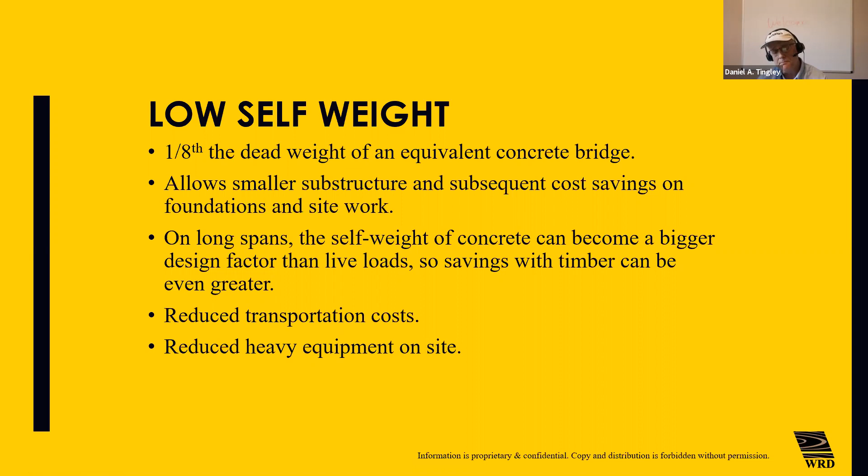It allows reduced transportation cost because the system itself is lightweight and providing great strength to weight ratios. And it reduces the amount of heavy equipment on site. The crane sizes can be less, and the site preparation works and cost can be less. This also leads to another point, and that is rapid installation.

When we fabricate the components off-site, for example, in greenfield construction, where we're machining and developing and assembling the bridge prior to treatment, that means that when we take it apart, letter and number it, send it out for treatment, make sure the treatment is right, send it to the site, the components can be, in a sense, put together much more quickly, and on-site times are reduced.

This is a big factor, particularly where you have short building seasons, environmental issues like rivers that can't be worked over or in during certain times of the year. So these things are important. It's important when you think about working during the winter, when you have to charge up concrete with plasticizers. With wood, you don't face those sorts of things.

It's important when you think about paving a bridge - you certainly don't turn on vibratory rollers to pave and get good consolidation on a freshly minted concrete bridge. You can with timber. So these things all improve the installation characteristics and the speed with which you can do it.

This is a bridge here in Brisbane, Australia that I designed. It's a 2-lane bridge with a 2-meter wide sidewalk where everything is assembled on this bridge, and the whole assembled 10-meter section drops into the cantilever clips in this bridge with one lift. The crane operator for this job shared with us that the previous week he had lifted a precast concrete girder for the same span - one single girder - that weighed more than the entire assembled segment they're lifting there.

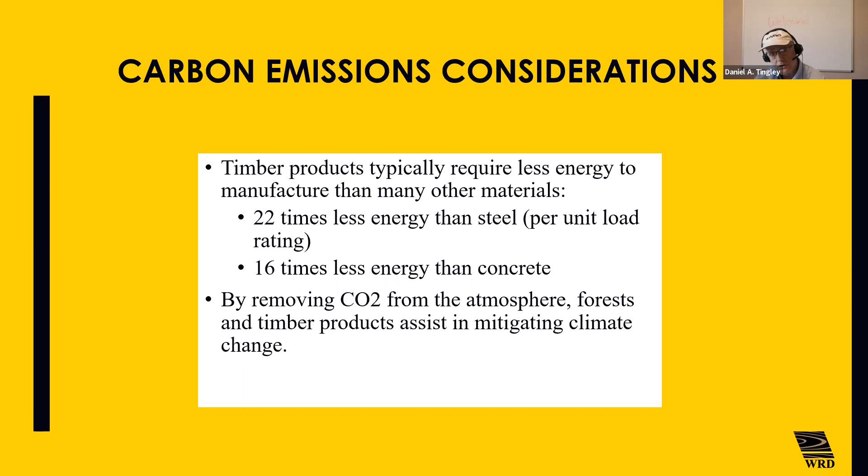Timber bridges traditionally take 22 times less energy than steel and 16 times less energy than concrete. And by removing CO2 from the atmosphere through photosynthesis, trees sequester carbon and put oxygen back into the environment. Wood is just the logical choice for timber for bridges.

Wood also has factors like chemical resistance. In Nova Scotia, we don't allow the use of rust-resistant steel because we know that a patina of dew or water on the surface of rust-resistant steel that has salt inladen with it means that it will reduce its longevity, not improve it. And so in Nova Scotia, many parts of Nova Scotia and some of New Brunswick, the southeast portion of New Brunswick, we're in the highest, what we would call embedded and exposed corrosion zones in the country. Not nice places to build steel stuff.

Wood has a natural resistance to these issues. For example, we put salt on the road - salt is a natural preservative for wood. It doesn't lead to corrosion of wood. Wood doesn't rust.

I often hear people saying they look at a rust stain on a wood bridge from a piece of metal and they say, look, the wood is rusting. Wood doesn't rust. It might have ferric ion degradation from untreated steel connectors, which leads to an embrittlement of the lignin, but it doesn't rust.

Wood is with great advantages in cold climates. It doesn't shrink and expand with thermal change to near the effect of steel. Steel's coefficient of thermal expansion is 3 times timber. And of course, in these coastal environments, wood has such great chemical resistance. Fatigue resistance, wood doesn't need a dynamic factor like steel, an impact factor. Wood responds very well to impact loads.

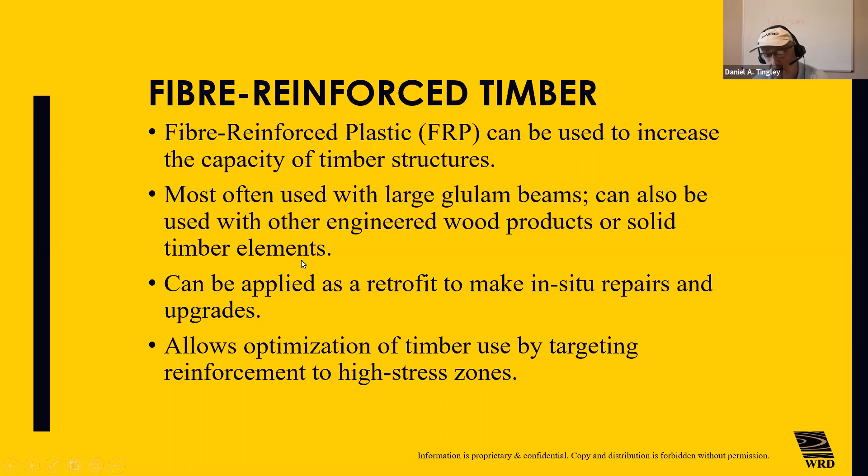We can use advanced technologies like high-strength fiber reinforced polymers, using them in strategic positions to enhance capacity, to compensate for reduced capacity that's occurred because of decay, for example. We can take these long pieces of fiber that come on a roll, five times the strength of steel at a fifth the dead weight longitudinally, with no strength perpendicular to the axis, so they can be put on a piece of wood and move with it, shrinking and expanding without causing delamination, enhancing capacity in situ.

This is a teaser slide for next week's webinar, where we're wood welding things. We take shear plate pilot holes, and instead of leaving them as open holes where they can slip, we put them in this hole and control slip distortion.

Infill this pilot hole, glue FRP to the face, and separate it from the steel with saran wrap so it doesn't glue, because the steel has a three-fold difference in coefficient of thermal expansion. Use the continuous piece of FRP on the bottom of this to double the capacity of the glulam.

We do three bridges for the price of one, and post-treat everything after machining so that it lasts 100 years. This is what we're talking about. This is the new timber bridge. These are the concepts and ideas that nest themselves in the idea that timber bridges can last, they can carry heavy loads, and their maintenance costs are lower. That's what we're here to say. So that's a teaser for next week.

Timber can be quite durable, but durability depends on quality of the wood, the preservative, the use, the environment, and the loadings that are applied. Timber does not behave in a truly elastic mode, but has kind of a time-dependent behavior. It's kind of different, isn't it? It's not the same material.

One of the hardest things I have to do as a senior engineer at WRD is to hire older steel designers. It's a very difficult job. And my favorite is to take younger engineers that have a lot less experience and help them understand about timber, and train them about timber and have them become timber engineers. Why? Because they don't have to retrain bad habits.

Wood is anisotropic, steel is isotropic. Wood is hygroscopic, it breathes in and out moisture, and when it does, it shrinks and swells. Steel doesn't. Wood doesn't expand nearly as much under temperature change as steel. And when wood shrinks and expands, if you've frozen it to something where it can't shrink and expand, what happens? You introduce tension perpendicular to grain forces, and tension perpendicular to grain is wood's weakest strength direction, on the order of 0.1 MPa. So understanding how to design with steel versus wood is pretty critical.

So let's just set up the foundation for ourselves, the basis by which we design wood in an advanced way. After all, it's the fundamentals of wood that really create an understanding of the building blocks that you use to grow your design capabilities as an engineer. It's important to cycle back and think about what is this material called wood, and what interesting characteristics does it have that are positive for us when we're designing a bridge.

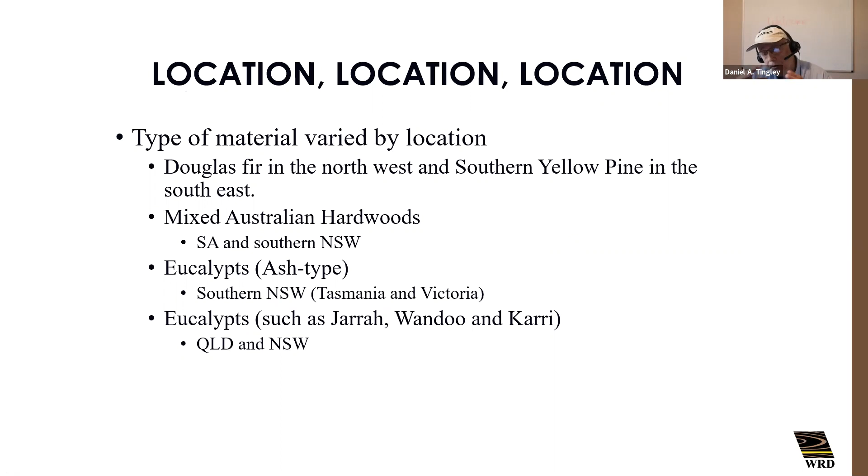And location, like real estate, was everything. And around the world, what did we use? Well, in the northwest part of the United States and Western Canada, we used Douglas fir. It was there. In the southeast, southern yellow pine. In Australia, we used mixed Australian hardwoods. All around the world, we used the materials that were readily available. And these materials were available in great supply at low cost, and so was the cost of manpower.

And this material became the predominant material for infrastructure growth 100 years ago. Cutting big trees down, cutting them up, one tree, one train, and sawing them into lumber and building infrastructure.

Well, today we often look back and we say the big wood's gone. We say good wood is harder and harder to find, and the big trees in Vancouver Island, for example, they're in parks. And the environmentalists don't want us to cut down the old growth because they want to have a few old big trees for the kids to see, and they want to have an opportunity to see and relish the size with which some of these trees can reach. Like the General Sherman tree, where you can drive a car through it in California, or the President, a huge tree nearly 50 stories high in California.

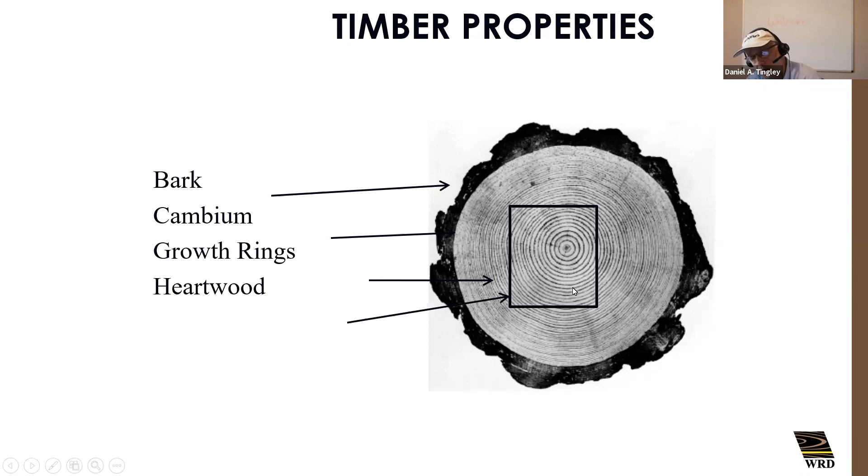You can see here, for example, Doug fir, it's a Doug fir log. The first 20 years are juvenile wood. They form the heartwood, that's the inert portion of the tree. This is the sapwood here, and you can see a much tighter ring structure.

Well, that isn't happening by accident. How come this is happening? Because the cells grow around the tree. I'm going to stop here and go over to the board for a minute.

Here's a round log right here. How do cells grow on this tree? Trees grow volumetrically. If I have a tree like this, this is my trunk, it's growing volumetrically, it grows radially. It's not grass. Palm trees are not trees, they're grass, they shouldn't be called trees. Trees like maple and Doug fir and southern yellow pine grow radially.

And what does that mean? I have at my home, not far from here in Lower Cape, New Brunswick, a maple tree out front that's 250 years old. There's a branch on that tree, and there's a swing on that tree, and my dad's dad swung on that swing, because the tree has been on the household property for 5 or 6 generations.

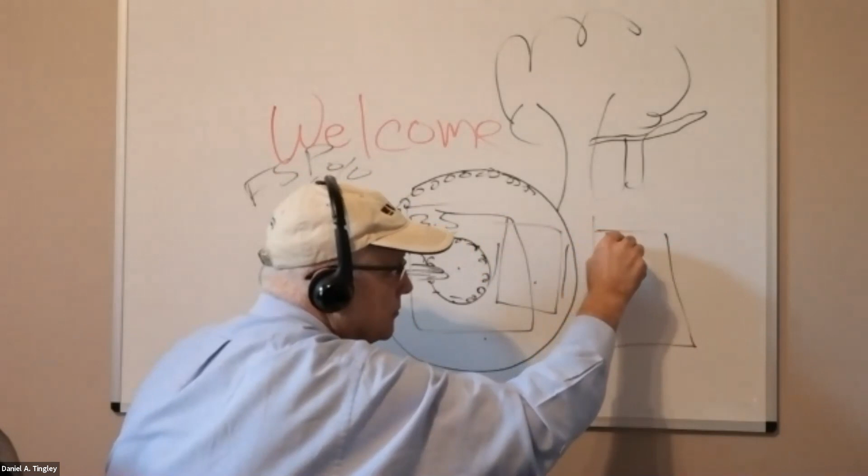So if I cut a boxed heart, it's going to shrink more evenly on all sides. If I cut a cant, it shrinks more on this face than that face, and it will look like this after it's dried. So if I've got that piece of wood sitting on a cap, it creates instability by shrinkage. If I've got a boxed heart for a cap, it's better because of less instability due to bearing. That's how trees growing volumetrically impacts how we use them as timber engineers.

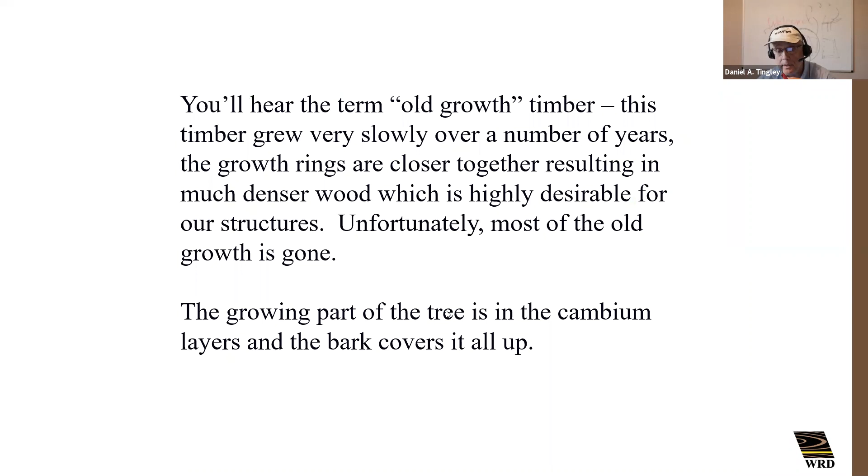As you look up the tree, you'll see something very interesting: it's growing straight. Why is that? Because softwood trees are geotropic—they grow in response to gravity. Their specific gravities are generally lower than those of hardwood, which is phototropic. Hardwoods grow phototropically; they respond to light.

They reach for light, and when they do, that causes slope of grain in sawn timber out of them because they're bending, crooked, twisted. Softwood trees grow straight up and down, and that's because they're geotropic.

Doug fir has 2/5 the height in its crown, which means this big clear length here would have no branches. What does a branch do? It forms a knot when you saw the timber out of it, and the knot is denser than the rest of the wood, but it creates slope of grain. That's why the wood is weaker—because of slope of grain. We'll get into that in just a moment.

So this phototropic nature of hardwood causes it to grow in response to light. The geotropic response of softwood grows in response to gravity. It's got slope of grain driven by the axes that the piece forms against the growth.

Now I've got this piece of wood, sawn from a round log like this. Here comes this log, tapered, and I saw a piece off of it. The angle that the sawn piece forms with the trunk creates a slope of grain, so when I look at the side of a piece of wood, here's the grain, and that angle right there is slope of grain.

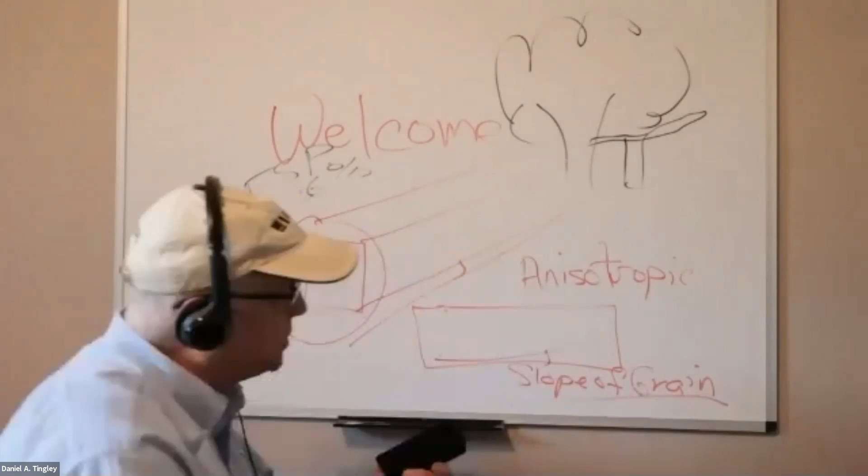Why is that a problem? Well, because wood is anisotropic, meaning it has different properties in different directions. So what is it about this slope of grain that takes the anisotropic nature of wood and creates trouble for us as engineers?

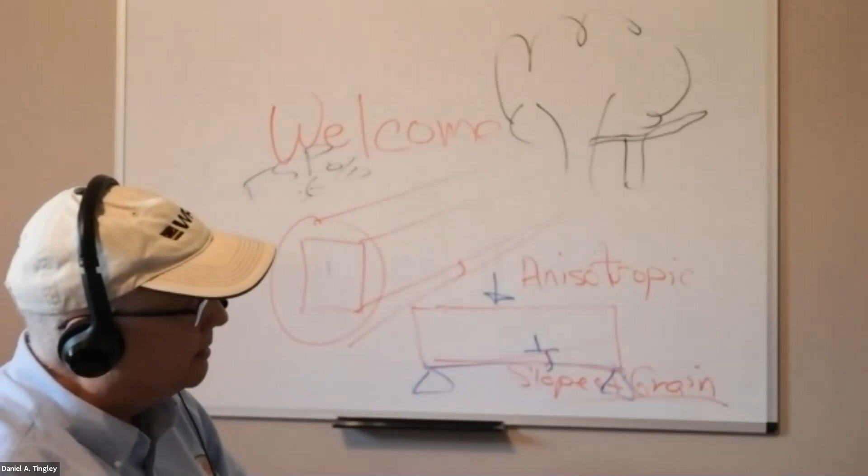When I saw a straight piece of wood out of a tapered bolt, I end up with the axes of this wood at an angle to the grain. If I put this in bending, the bending forces can be resolved into tension parallel to grain and tension perpendicular to grain, and wood's tension-perpendicular-to-grain value is low in terms of strength. The more the slope of grain, the more resolution of stresses to perpendicular-to-grain tension, and the weaker the wood is in bending—it's the tension perp that gets you. So we want low slope of grain; that's what forms up structural select wood in our grading.

Now, when I have a knot, what happens to the grain? The grain follows the knot around.

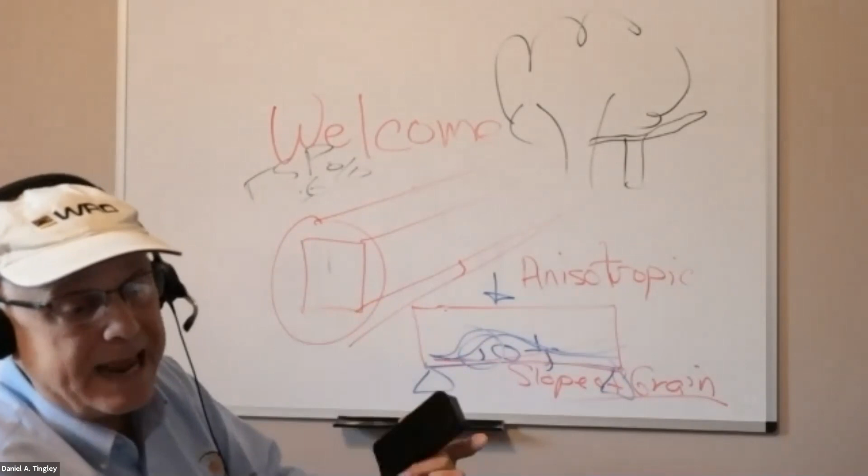If I get a knot in the bottom face of my piece, it causes a slope of grain, a big one, and that resolution of stresses causes a bunch of tension. The knot is the localized defect, the naturally occurring defect that leads to slope of grain, which leads to reduction in capacity. It's why we grade things for knot size, and why we keep the big knots out of the bottom face in tension.

If you're designing heavy dimension timber beams, there is an upside down. When I went to school at the University of New Brunswick, nobody taught me in my forest engineering degree that large dimension timber has an upside down. Why didn't they teach me that? Why did I have to install a bunch of girders and have half of them fail before I finally figured it out?

The reality is, when we're not teaching engineers about these issues and instead teaching them about steel and concrete, what will they use when they get out in the marketplace? Steel and concrete. And when they install the new girders in the old bridge upside down and they prematurely fail, the owner of the bridge says, to hell with timber, put a new steel and concrete one in, I can't pay the maintenance cost anymore. You see, that's not wood's fault. Understanding that is important for us if we're going to properly design with timber.

At the tip of a tree, there's a hormone called auxin that tells a tree how tall to grow, where the roots go, the whole deal. The root growth kind of looks like a microcosm of the crown of the tree up top, only underground. And the tree, as it grows, forms a microfibril angle.

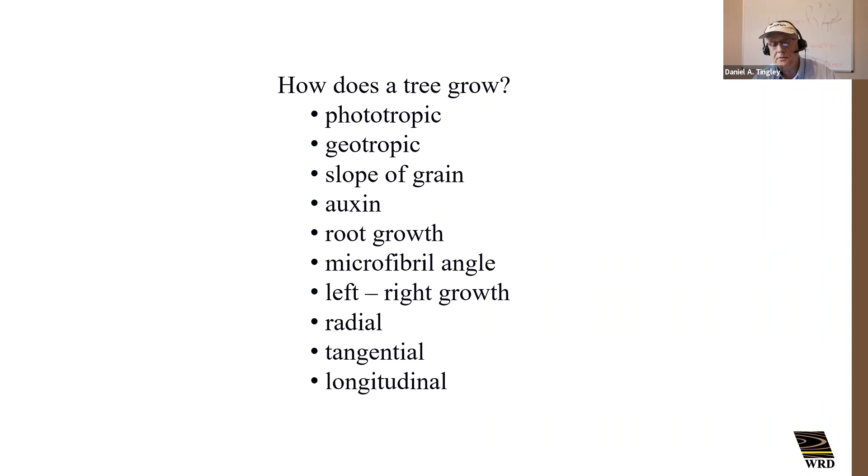On the northern hemisphere, trees grow and twist from left to right. In the southern hemisphere, they twist from right to left, just like the water in the toilet bowl if you're in Australia. So trees have a radial direction, a tangential plane, and a longitudinal plane, and they're different.

They have different characteristics. Wood has 9 degrees of freedom: 3 Poisson ratio, 3 rigidity modulus, and 3 modulus of elasticity. That's a big deal if you're using structural software that only allows you 1, 2, or 3, and you're putting loads into a structural software for an assembly of wood, and the wood hasn't been modeled with 9 degrees of freedom. Guess what? The results may not represent your true stresses.

So timber's properties are based on orientation of the grain and the direction of the fiber. Its density bears directly on its properties. Typically, the denser the wood, the higher the MOE, and the bigger the increase in capacity parallel to grain. But not all characteristics go well with increased density, because hardwoods could have increased density but much greater slope of grain, which would make it very, very weak. And if I couldn't drive a nail in it and I had to drill everything with holes to put bolts in, it wouldn't be user-friendly.

Thus, Douglas fir and southern yellow pine became the wood of choice around the world. Their specific gravity was 0.48 to 0.54 for the two of them, about half the density of water. That's why specific gravity is about 0.5. They could still be nailed without splitting and checking or breaking the nail. They're relatively strong. If you sawed them on the right bolt, you could get low slope of grain. And then if you graded them for knots, splits, and checks, conditioned them and controlled their moisture, you could improve their dimension design properties. These types of woods became very popular in the world.

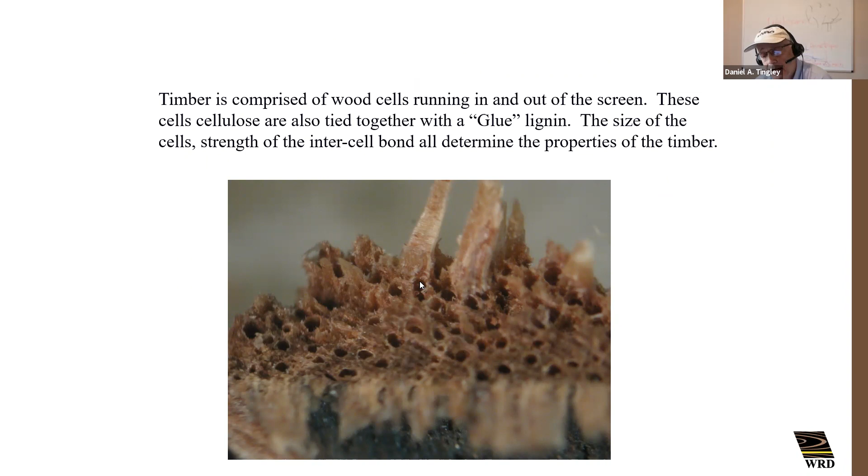Cellulose, hemicellulose, glued together with lignin - that's what formed up wood. And you notice this piece here, how did it fail? It was in the roof system of a pulp and paper plant in Washington State, and it had reaction wood. It was called compression wood in softwood beyond this webinar - reaction wood in softwood is compression wood, reaction wood in hardwood is tension wood. It was put in the wrong place in bending and led to failure.

So we need to understand these characteristics of wood. Timber properties are based a lot on how it grows. It has localized defects like knots and slope of grain. These things all get considered when we're developing design values.

For example, with wood, the composite adjustment factor used to calculate the design value for strength properties is based on 1.3 for safety, like concrete and steel, the same kind of safety factor, and 1.6 for duration of load, because wood tends to creep. It's got a viscoelastic lignin, that's the glue, and it will creep under constant load. So we change this 1.6 effectively by using a CD factor in Canada, or load duration factor.

Our current design values are based on the assumption that our live load will have a cumulative life of 10 years on our timbers. If that cumulative life of 10 years is assumed to be longer because of higher percentage dead load, we factor down the strength, effectively increasing the 1.6 DOL. If the load is going to be less, like wind or impact loads, we factor it up by using a different CD value, 1.25 or 1.15 for snow, for example.

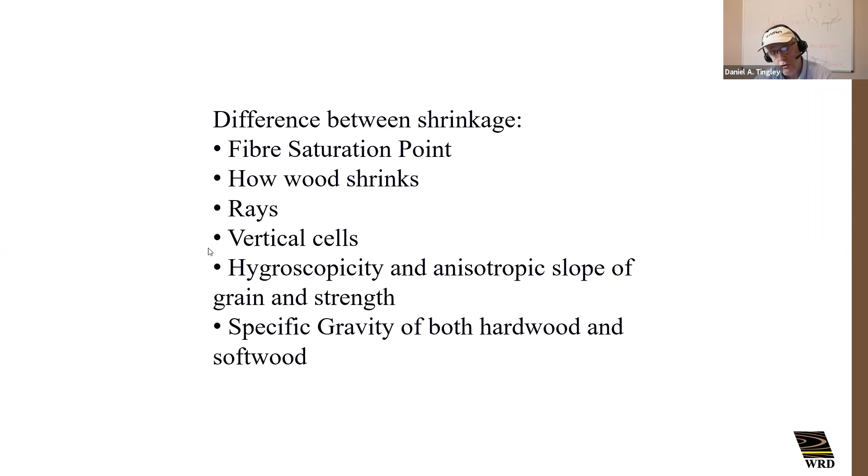That's the point where the water in the cell wall has saturated the cell wall, that's fiber saturation point. When wood picks up more water and it goes into the lumen, it doesn't shrink and expand anymore. When it loses water under fiber saturation point, it does shrink. And the cells within wood go radially, vertically, and they're all the same. They're hygroscopic and they're anisotropic. They have different properties in different directions because they're longitudinal in nature, most of them, whether they're rays going across the radius of the wood, or cells going up and down the wood. They're longitudinal in nature. That's why they make great paper.

So fiber saturation point has got bound water and free water. When I get a spruce tree in the Maritimes and I cut it down, in the winter we used to cut our wood because the moisture was kind of out of the tree a bit, and we could put it in the spring breakup and float it down the river. Well, when I cut it down, I might have 70, 80% moisture by weight, or 90. Sometimes wood can have 180% by weight. It weighs a lot more when it's sucking up the water than it does dry. And so this wood in what we call free water, or lumen water, L-U-M-E-N, the lumen water doesn't change the dimension of wood, but it certainly changes the weight of wood.

And as it dries out down to 28%, the bound water begins to leave, and then it shrinks. And generally speaking, when water dries out of wood, it gets stronger, generally speaking. So the drier the wood under FSP, the stronger it gets.

So if I put a strain gauge, let's boil this down to something practical. If I put a strain gauge on the bottom of a piece of Douglas fir that's on the bottom of a truss in a through truss bridge, that strain gauge isn't going to act like a strain gauge put on this piece of steel. What happens with it? When I put a sender on it, connect it to a gateway, and record strain from truck traffic remotely, I have to be considering more than just the truck traffic. Look here, here's the tide going up and down underneath the bridge.

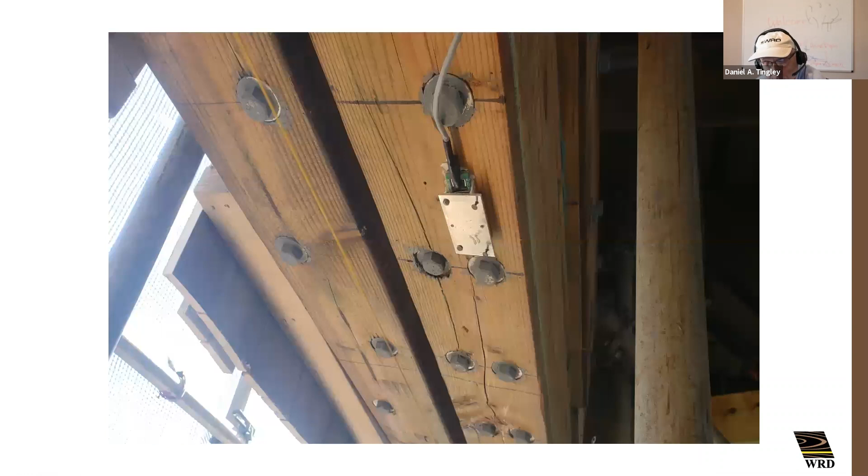Watch what happens to the strain as the tide goes up. That's a steel foil gauge placed longitudinally parallel to the grain in the bottom tension chord. When the tide comes up underneath it, slowly that timber picks up moisture, and when it does, it wants to expand. The steel foil gauge doesn't, and it registers as tension. So you see this increase here, just following slightly behind the tide. We need to understand that to put control gauges in place, to synthesize out the real strain by taking the effects of relative humidity and moisture content change out of the equation.

Understanding wood is important for monitoring bridges, for example. As I said earlier, there's the tangential direction, the radial direction, and the longitudinal direction. Wood basically shrinks negligible amounts, 0.1, even 0.2%, longitudinally. That's how we can use stud wood in the Maritimes to build houses and not have them settle.

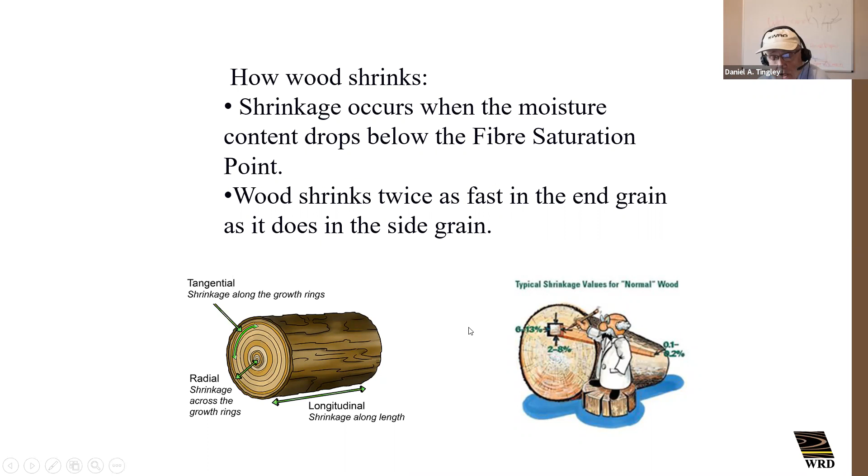In the Maritimes, if you buy a log home, you know about putting spaces above your windows and doors, because when the log home dries out, it'll seize up all your windows and doors if you haven't left spaces. Why? Because it shrinks that direction a bunch. And if you build a six-story hotel with stairwells and headers at the top of each layer in platform framing, what happens? That timber, the 2x12s, can shrink, and you can find your stairwell in problems if it's steel. You have to have slips. That's the nature of wood - it shrinks a lot radially and tangentially, but very little longitudinally.

That's why these shrinkage checks in the end of logs look oval, because the tangential shrinkage is double the radial. That's why they look this shape. That's a naturally occurring check. Why? Because end grain travel of moisture is 100 times faster than side grain. That's why things end-split. It's why they try to put nail plates on the end of pieces of timber, to try to keep them from splitting, because it's 100 times faster end grain travel than side.

So what do we do to control this? The old ways of putting stress kerfs in. It allows air to get into the center. It's a non-structural change to the wood, and it lets it shrink and dry more evenly in these boxed-in hearts. At the Boyce Farmers Market in Fredericton some 35 years ago, I was practicing this technique as a young engineer designing timber post and beam frames in the Maritimes.

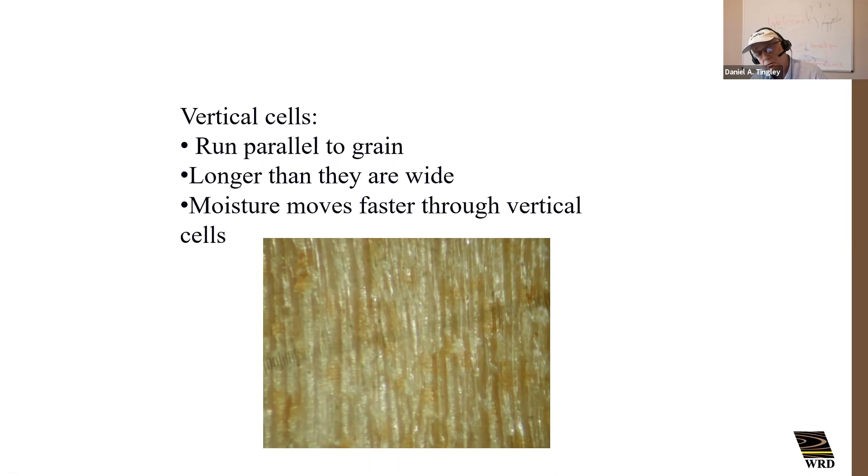So these vertical cells have microfibril angles. They run parallel to grain. The microfibril angle can create a slope of grain, as can the axes of the wood cut against the grain of the wood itself. So these characteristics of wood are driven by hygroscopicity, the anisotropic nature of wood, and its characteristics such as density and knots.

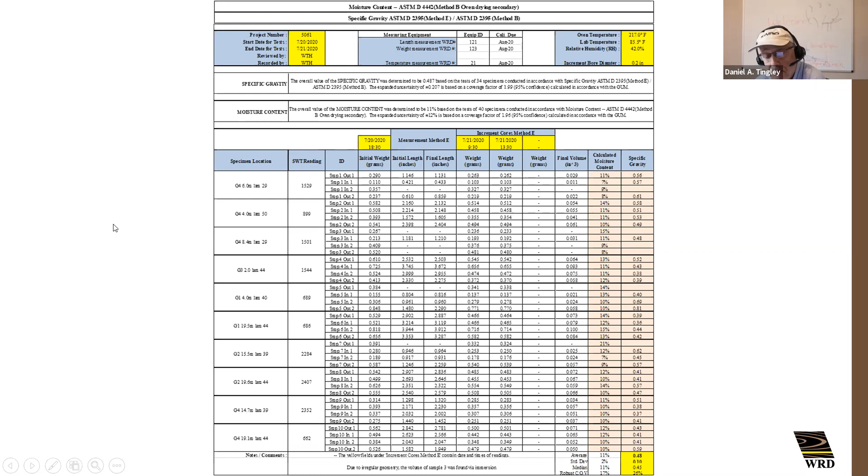We can core out a piece of wood, take the core, check it out and do an ASTM standard test to determine its specific gravity and its moisture content - outer, inner, inner, outer - through the piece. We understand the moisture contents of wood and timber bridges well, because now we've got close to 2,000 samples over decades of wood tested from different bridges all over the world. That's how we know moisture contents.

We can use these small cores to identify them as coastal Douglas fir, for example, and understand that coastal Douglas fir doesn't have blocked up pits that can mean they're aspirated and won't take side grain travel of moisture and of treatment, more importantly. So we usually like to treat coastal Douglas fir timbers for use with bridges, because species, whether softwood or hardwood, grow in a way to form branches, heartwood, sapwood, and density, and all these knots can impact the properties of timber.

So as you see this fissure, for example, that's not a shear crack, that's a shrinkage crack. It follows a ray - a ray is a cell that went radially, in between the cells that go tangentially. So when the cells tangentially were shrinking a bunch, 7.5% from fiber saturation point to zero, the stress relief came along a ray line, and a fissure or check was formed. When engineers go out and see timber in the field, they often confuse checks with shear cracks. They're not the same. We need to know the difference, and we're going to get into that now.

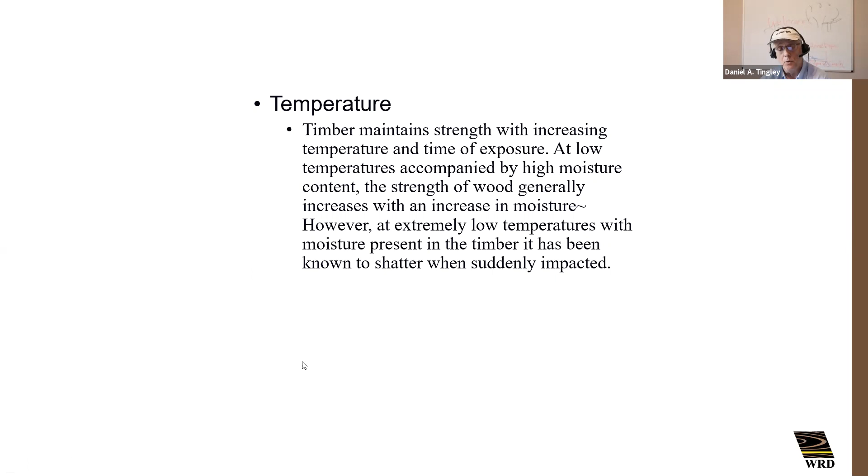Timber maintains its strength with increasing temperature all the way up to 150 to 175 F. It's pretty good with temperature. It doesn't expand like steel, and it doesn't blow the joints out in the building under even low heat fires like steel will. But wood sucks up moisture, and it reduces the modulus of elasticity as it increases in moisture content beyond fiber saturation point.

Particularly, wood does not change in characteristics above fiber saturation point, but it does below it. So design properties can really drive the equation with wood.

You can see this knot. He's on the upside, which is good, but look at that slope of grain. When I put him on a test jig, he fails in tension perp. That triggers an MOR, a modulus of rupture, in bending.

Grading agencies are set up to help us define wood. What's their purpose? Well, if an engineer sits in an office and designs a bridge assuming number 2 or number 1, he puts it on his drawing, then it goes out to tender, and a contractor picks up the drawing and wins the bid. He has to be able to go out and buy something the engineer designed. So there are grading agencies in place to help grade lumber consistently so that engineers can use a grade, and contractors can understand and buy that grade. These different agencies are set up around North America and the world to help sawmills, providers, and manufacturers grade their wood in a way that engineers understand.

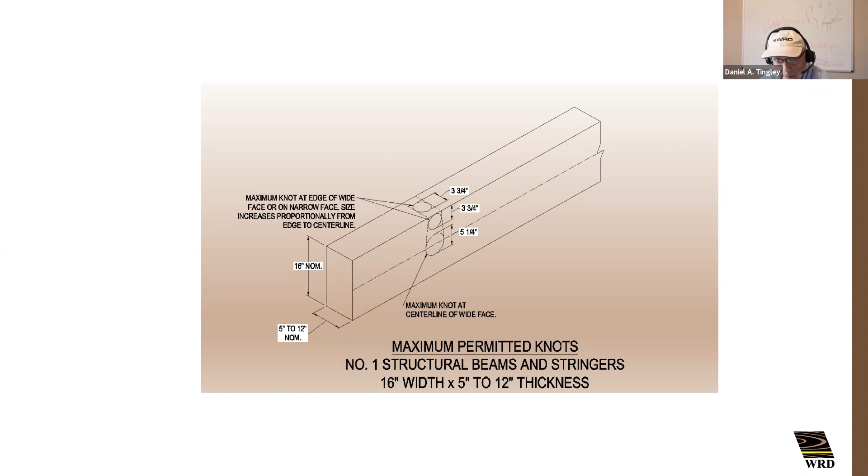When they grade wood in large dimension timber, they allow bigger knots in the compression zone. If engineers and contractors don't understand this, there's a 50-50 chance that even a number 2, number 1, or structural select timber gets installed upside down. When that happens, big knots end up on the bottom, and slope of grain triggers premature failure. We don't like that to occur.

So I'm hoping that everybody online today can understand these important factors in their own design world.

Design properties in tension and compression parallel to grain also trigger mechanisms of failure in wood. You can see here this localized plastic shift, or what happens by the yield point in compression. This is what goes on with this column, as you can see, sliding by one another.

Piles will find localized zones of MOE in compression that are weaker, and they'll find plastic shift there. The plastic shift occurs at different points of the pile under excessive axial load, where the yield point and MOE in compression is lower, and that's where you get these failures. These failures are not nearly as bad as tension failures, because tension failures often lead to immediate global collapse, whereas localized compression failures don't. So these are differences between tension and compression testing.

We can do compression perp. Another interesting thing for engineers: compression perpendicular to grain strength values are not strength values, they're specific values. They're the load, the stress that causes an 1/8 inch deformation in the piece at the reaction, confined to the bottom half or third of the beam. The reason in Canada we have opposite side compression factors for bearing that are more aggressive is that if we have bearing at top and bottom at the same location in a horizontal piece, that creates double the deformation, thus the reduction factors for it.

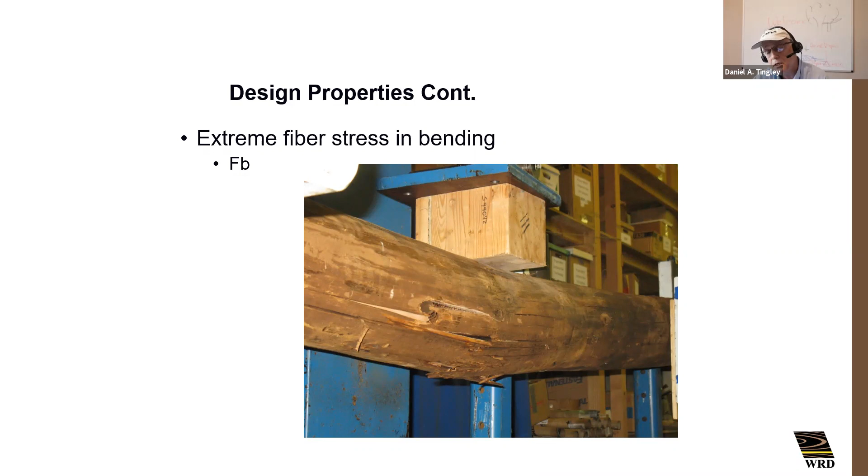People ask in Canada why round log values are so low. Well, it's because we just haven't used them much, and the values for round logs in bending are based on empirical, smoke-filled-room properties. In Australia, you can take a round log and have an F27, or 27 MPa allowable stress design value. The minute you saw a piece of timber from it, slope of grain comes into play, and its value drops from 27 MPa to 17, 22, maybe even 14, because of slope of grain created by the axis of the saw.

Typically, when you see pieces of wood attached, they're not horizontal shear. I wished someone had taught me that the value for shear was not transverse. In timber, what governs is longitudinal horizontal shear, and you can see these shear values for those interested. The late wood, early wood interface is where 66% of all horizontal shear occurs - that's where the wood starts to grow again in the spring. The lumen's the biggest, the wall's the thinnest, and horizontal shear is the lowest, and you can see it here in these pictures.

So the codes and standards in Canada, what are they for? The National Building Code for building with timber, CSA O86, or NDS in America, are for designing with timber for engineers. What do the bridge codes do? The bridge codes like S6 in Canada, AASHTO in America, or 5100 in Australia, stand between the timber design code and the site for a bridge designer. S6 Part 9, I'm on that committee, is an interpretation of how O86 applies to a site with specific reference to highway traffic. And O80, for example, is about how we preserve them. So these standards help engineers design and utilize timber correctly.

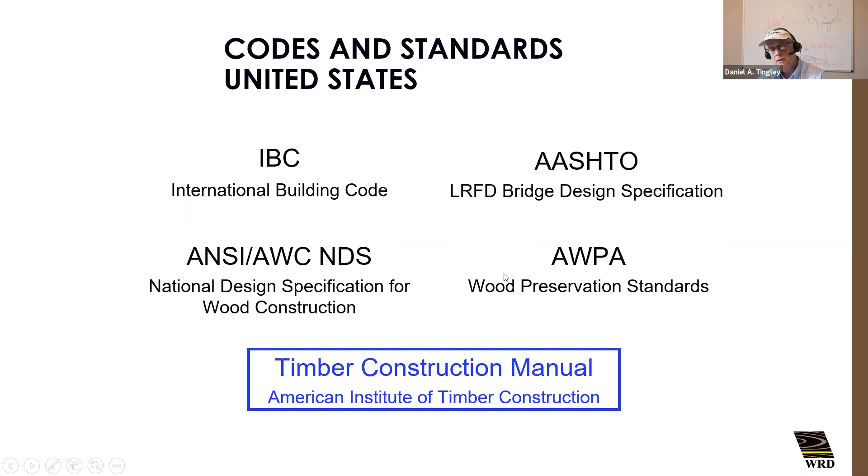We rate timber bridges, we rate existing bridges with Section 14 of S6, which itself reflects back on Part 9 and O86 in terms of helping engineers understand rating of existing bridges. For example, if I'm rating an existing bridge that's seasoned, I wouldn't have to consider it green. If I'm building a new large dimension timber bridge, I have to consider most of its elements green because they go into place green. In a tactile inspection, I can consider them dry because the average moisture content is 14 to 16 under either closed or open deck bridge. What I couldn't consider as dry would be the connectors if there were vertical fasteners originating from the top - I'd have to consider those green because I let water into the bridge core through the fastener. Codes and standards in the United States work the same way: International Building Code, National Design Specification, AASHTO stands between it and the site, and AWPA is the Wood Preservation Standard.

So how do we get the type and quality of timber that we want? Well, the industry has set up these grades. Engineers design according to the design standards, specify the grades, and contractors buy them. These grade agencies have identified these knots.

Just a little review here because it's important - conditions for decay. In an in situ bridge, decay accounts for 82% of all timber bridge degradation today in the world. It's not impact load, it's not salt on the road - contrary to all those opinions, it's due to fungal decay. The conditions to create fungal decay are pretty specific: you remove any one of them, wood bridges don't decay. Oxygen over 21%, moisture over 22%, temperature in a 5 to 35 range, and of course wood is the food source.

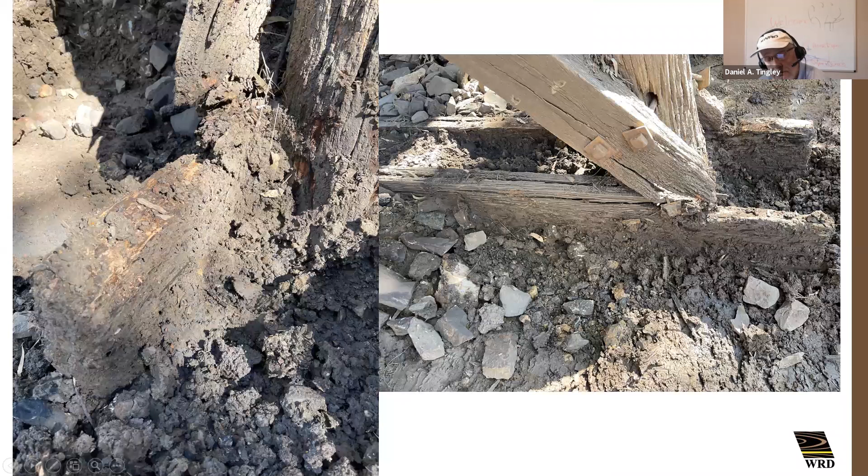And I can guarantee you this is true, because if I put a wooden lawn chair out on the deck out back and I leave it, within 2 years it's done. Because it's decayed. It's just every day. If it's not treated through and through, and if I've exposed bright wood, it decays.

So the combination of decay leads to insects, because it breaks the wood's specific gravity down and it feeds on it. And this degradation comes because there's an enzyme secreted by the hyphae that grows in a fungal colony, and that is acidic. It breaks the wood down. When it does, it's edible. And that edible wood is reduced in specific gravity.

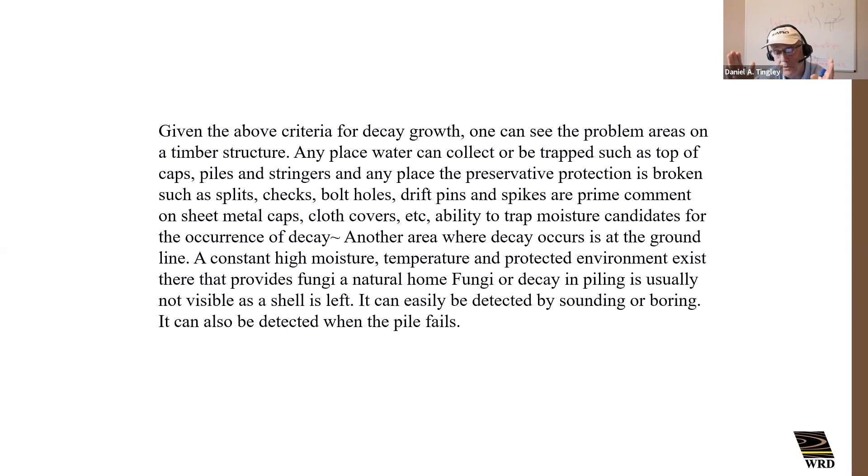And as little as a 10% loss in specific gravity can lead to an 80% loss in compression perp, 75 in bending, and 65 in shear. That's why we see compression bulbs at the ends of beams that have got decayed at the ends around vertical drift pin, is because they lose compression perp to grain first and they bulge.

Why? Because again, it's a specific criteria, not strength. There's no safety factor. It's the stress that causes an 1/8 of an inch deformation. So I get 80% loss. Why? Because I've got a lot more deformation for the same load, because it's losing specific gravity.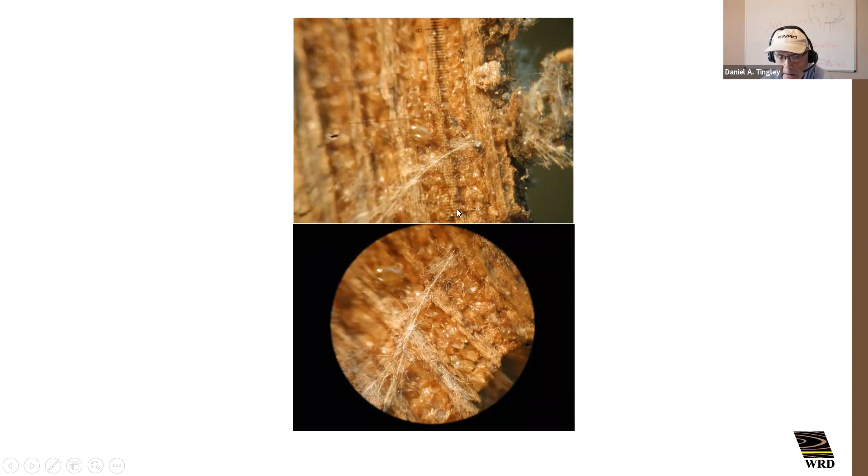So how does fungus grow? Well, it's got a hyphae and it grows cross grain. You can see here, there's white rots growing through the lignin. And it has a foot at the end of it secreting an enzyme. You can see these microscopic shots showing the hyphae here. And this hyphae has got a foot at the end, secretes an enzyme.

And people think, well, I'll drive a vertical spike galvanized into my girder down into the cap, and I'll try to get the water to stop going in by using a mastic around it. Doesn't work. Doesn't work, by the way, guys.

And I put a vertical from the top in this nice creosote treated piece. And I'm figuring it's going to decay in there, and I'm going to have to replace it in 10 years. So I leave the head exposed so that I can get it out easier. And so I'm accepting the fact that wood screws over at 10 years, even when I buy the premium incised creosote treated piece of Douglas fir timber, and I put a spike in it, vertical drift pin right from the top, put a mastic around it.

It still doesn't work. And it leads to decay in this piece in bridges just like this one in Camrose, Alberta. And you can see where it goes. Here's the vertical drift pin. Here's the stress wave time up in the thousands, when 150 to 250 is the criteria.

And this is the reds. And this is another shot. Here's up in the 1,000. And here's the reds. And there's what happens when you put the vertical in, the whole thing decays.

Beyond the scope of this course, but suffice it to say, look, this is an old cast square head vertical. This is the same connector. It's 150 years old. Which part of the connector is still going? The horizontal part. Which part is gone? The vertical part. Engineers listening, stop designing verticals that expose bright wood and originate from the top unless the holes, the pilot holes, are post-treated.

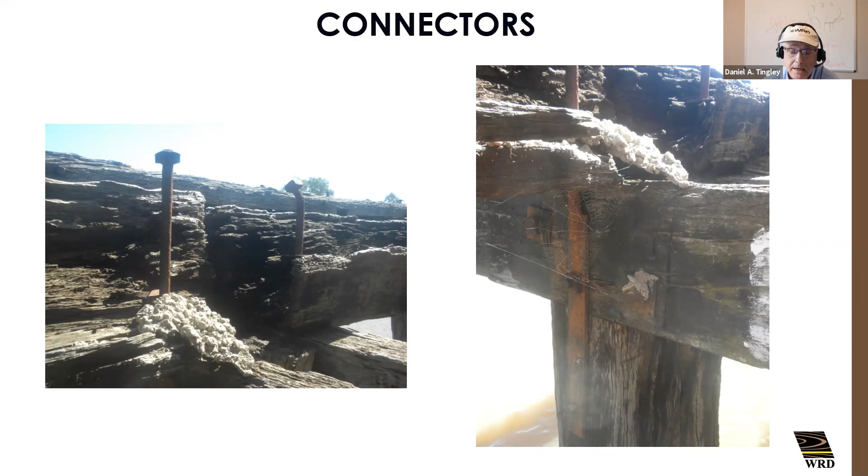Why? Because timber bridges are coming back. They're going to carve out their rightful place amongst the other two materials and be used in bridges across the country. I live for the day we drive across the Trans-Canada and see 3 or 4 of them as overpass bridges. Timber bridges need to come back into play. Design them right and they'll last a long time and people will use them more.

So I'm going to go back to this picture. Here it is. This is the galvanized vertical spike used as a drift pin in a creosoted piece of timber with incising, with a mastic around it. And guess how old that is? It doesn't take a lot of guessing to realize that it's probably in the 5 to 6 to 7 year old range, right? Here's the bottom of it right here.

What's this? That's a fruiting body growing out the bottom of it. What's this? That's the hammer hits from the stress wave timer start, where we're hitting it to measure the stress wave time through here. After 5 or 6 years in service, a brand new piece of timber that would cost you an arm and a leg today, and an arm and a leg for the labor to get it in. And they're screwing it over by putting a vertical in from the top when there's 16 ways to do it right.

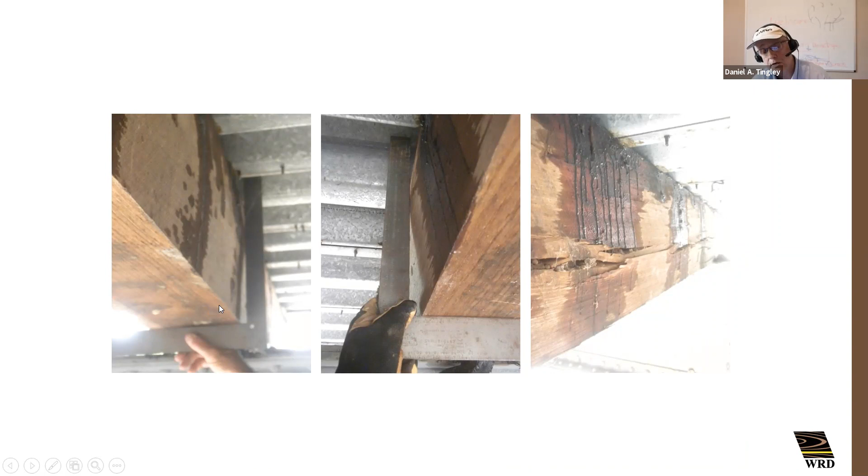Is a ballast tray deck put on 8-year-old cross bearers, vertical lag screws put in, petroleum jelly put down - didn't work. And they started to what? Mushroom compression bulge. Go to horizontal, switch the verticals out for horizontal, turn the 90 with your connectors, stay horizontal, put diffusers into areas that are subject to some decay because of moisture, and use durable timbers.

It becomes more hygroscopic. You know, decay causing fungi aren't stupid. The first thing they do when they start to decay a piece of wood is make it more hygroscopic. Why? So they can get more water. More water means more decay.

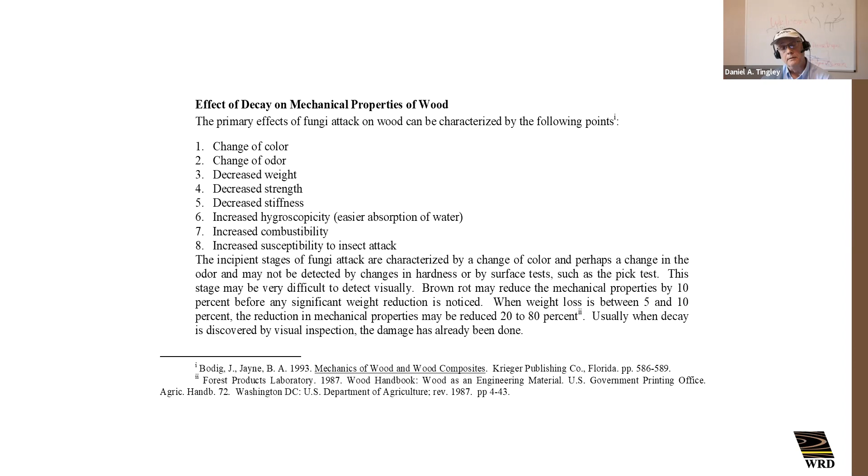What else happens? When you get decayed wood, it becomes more combustible. Its ignition point drops 100 degrees. That's why we can rate bridges now in Canada based on how decayed they are. The more decayed they are around the vertical fasteners, the quicker they burn. Why? Because the vertical fasteners let thermal energy into the middle. It's got a lower ignition point and it burns quicker. And they're more susceptible to insect attack.

So what do we do? We treat them. We don't treat them with waterborne preservatives because what? They leach up against the cell wall and they leach back out the next time it gets wet. Put an oil-borne preservative in there so that it fixes against the cell wall. Water and oil doesn't mix. And that's why codes like AREMA don't allow waterborne preservatives in their timbers.

They specify oil-borne preservatives. This is a Stanford's Bridge on Victoria, Vancouver Island. It was put together in 3 pieces, the flanges and the web. They had a secondary gluing. The secondary gluing didn't work too well, left gaps in a thick glue line. Water got into that thick glue line down below and formed a decay pocket.

And you can see the treatment in here. We knew that they probably weren't coastal Doug fir because the treatment was really shallow. And the laminations were pre-treated before glue. You can tell that by the way they break. And so you can see here what happens.

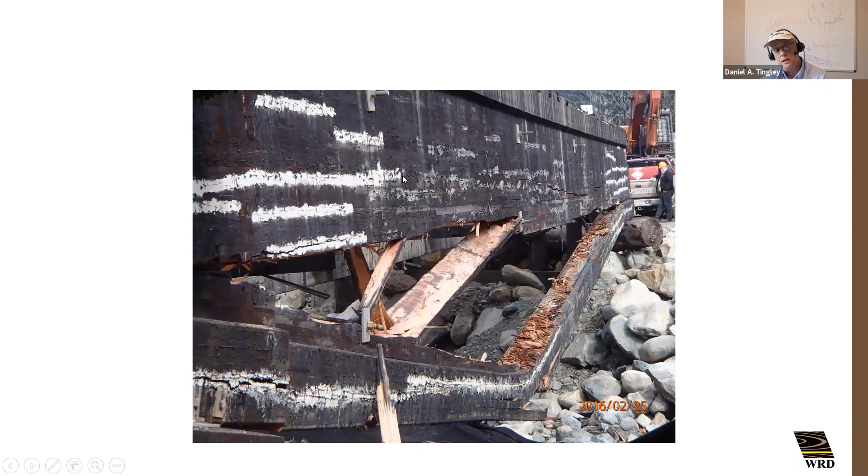And the engineers found naturally occurring shrinkage checks on the exterior girder and specified epoxy. Never works. Don't do it, because it always cracks and lets more water in, and then acts as a dam to keep the water in there. Let it breathe. Let the wood breathe.

Don't use heavy solids, paints and stuff on the coatings of wood over 29%. Let it breathe. So you can see here, cutting the piece. And here's where the piece - this is what caused the failure of the bridge. That's not wood's fault.

Nothing fixes stupid. It's not wood's fault, it's designers' fault, it's maintenance fault, it's the utilizer's fault. They should have found this before it ever became a problem, been able to fix it, diffuse it before it gets run away and decay leads to failure. So proper treatment and its effectiveness is critical when we're designing timber bridges.

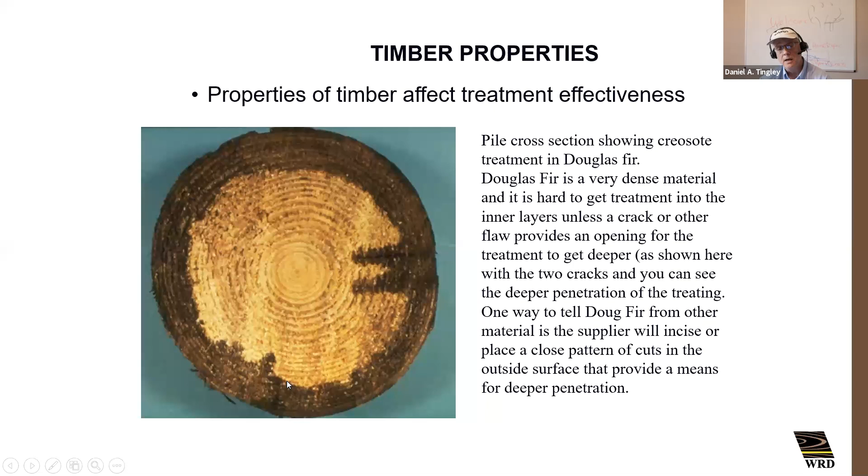Some wood has natural durability, others don't. They have to be treated. And we look at inland Douglas fir versus coastal. It's got tyloses.

It is... that's crazy. Just that far, I just went blank. I get all these words and I spin them off and then I run to the end of my tape and I can't keep thinking.

It is, anyway, the pits are blocked because they're aspirated. That's the word, aspirated. That means the pits have closed up on inland Douglas fir and they don't let transfer of the treatment laterally in the piece. So you can see here, this is a Douglas fir cant wood, no pith. It's a cant wood, we wanted to get it treated, so we incised it. Incising opens up end grain.

There's no injections, there's no people with a needle sticking it in there injecting it. So don't think incising is going on at the treatment time. It's incised first to expose end grain, because end grain travels moisture 100 times faster than side grain. So they incise it to get more uptake.

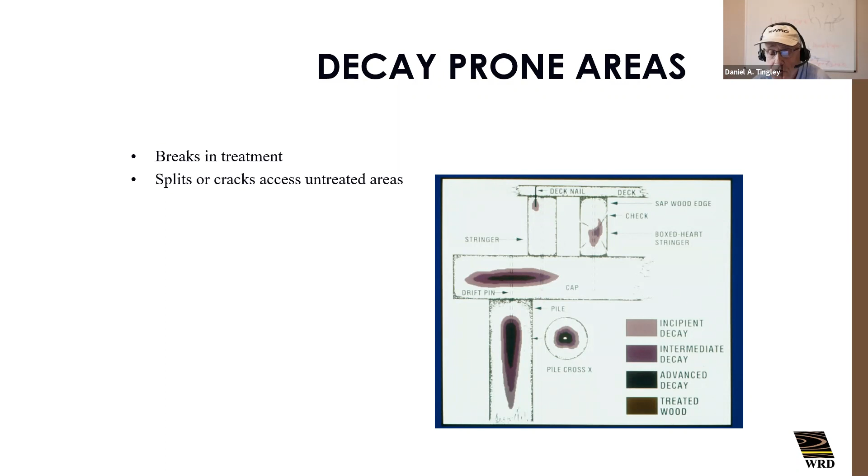Let's do them differently. How do vertical fasteners degrade timber? No brainer, they let water to the middle. And when you let water to the middle, even after 10 years, it has no shank strength anymore. The first debris field that hits it, this happens.

The concrete stays, the timber leaves, and the engineer looks at it and says, I should have built the whole bridge in concrete. If I'd done it, there'd have never been a problem. The ute wouldn't have been stuck on the other side of the bridge.

Instead of someone saying, why did I use vertical fasteners that led to decay around the shank of the fastener when I had no lateral capacity anymore and the first debris field took it out? That's what we're saying. Or why did I put sub piles in with vertical drift pins that led to decay so that I had to go to Home Depot and buy a piece of 2x6 to try and prop it up until I could get a new concrete bridge in?

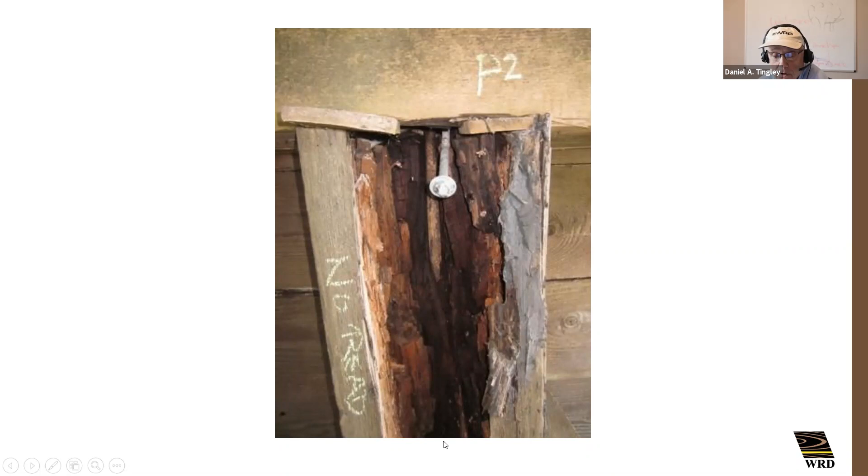Or this guy here, a vertical drift pin, so that I screwed over the pile royally and led to it being taken out. Or this one here in Hamilton, where I took beautiful 8x16 Doug fir and put the deck on with vertical drift pins, and look at every one done like this. They still did it.

So vertical fasteners are ruining them all. Look at this, stick your hands in it. It's vertical fasteners. And just because we put a covered bridge on, well, it helps us with some vertical fasteners that are inside, in the wind shadow.

But guess what? The ones on the ends, they get impacted too. And excavators fall through the bridge when they get to looking like this. So vertical fasteners lead to this.

So extending the life of our timber bridge assets is the way forward. They can be built to last a long time. They don't have a use-by date.

This bridge in Golden didn't have a use-by date of 40 years, contrary to the engineer of record. We recertified it for another 100. If you do it right, they last.

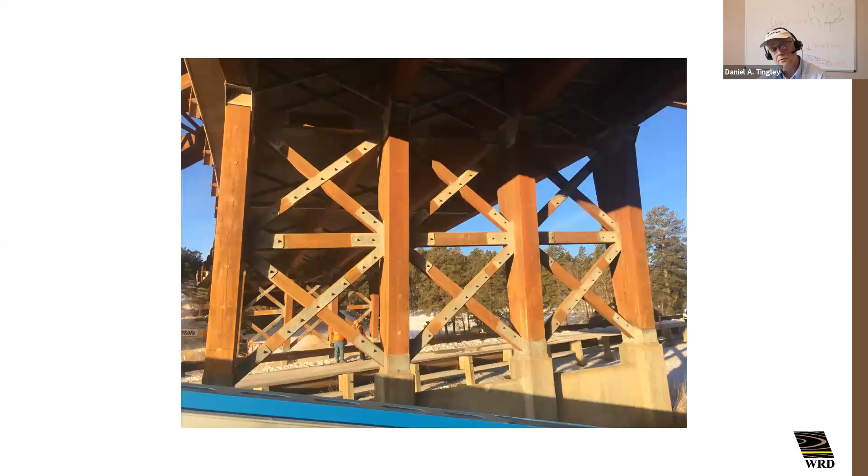This one at Keystone, they wanted to replace the whole interchange with a new concrete one, $23 million. They asked us to come in at the last minute just to inspect it, to confirm what they had thought. We could find only 3 bad actors in the whole bridge, and they were going to replace the whole bridge.

And the only parts that were really bad were these 3 where they put a new concrete slab on top and vertical drift pinned it. The only really bad elements were the concrete elements. So they had to replace the concrete deck with a new timber deck.

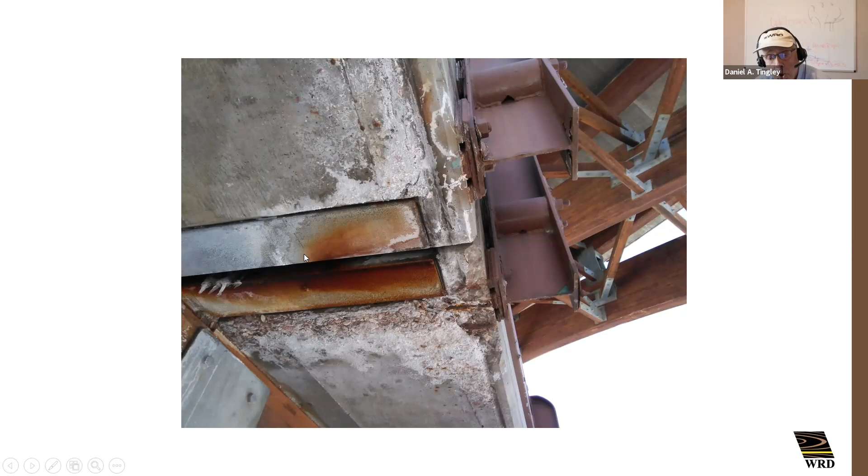And now it's out to tender and will be upgraded in September at a cost of $4.15 million versus the $23 million that was in the budget. We'll put a new timber deck on it for the first time in its bridge life, lightening the load the bridge has to carry by a significant amount, because the new timber deck is 1/8 the dead weight.

And away we go. This is Milky's, closer to home, Bayswater Inlet covered bridge. They asked us to get in and look at it, understand it, inspect it, find the bad actors. So we used rope access people to hang from the bottom, get in there and find the bad actors.

Where are they? Underneath the hog jaw assemblies. We drilled a hole to get in underneath and check. Where were the bad actors? It was the steel, man.

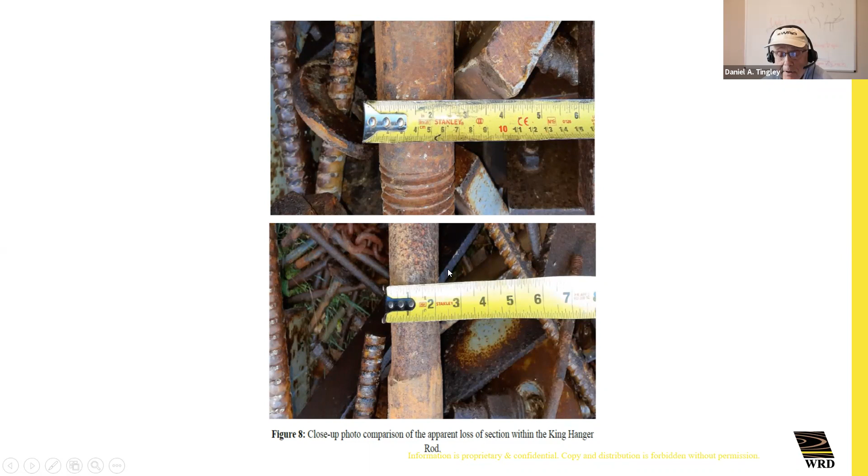The embedded corrosion hit worse than the exposed. Every place the old steel was underneath the wood, that nice salt air coming in off the Bay of Fundy wreaked havoc with stitching bolts, taking them down to 1/8 of an inch in diameter.

Look at this. Every place that was bad was the steel and metal. The vast majority of the whole degradation of the bridge was steel and metal, not wood. Fungal degradation had led to a few spots.

So we put 2 great big beams, 35 meters in there, and lifted the whole bridge up in the air so that we could take all the hanger rods out and fix everything, lifting 100 tons because this was lightweight enough to get across the bridge to get positioned with a 5-ton load limit.

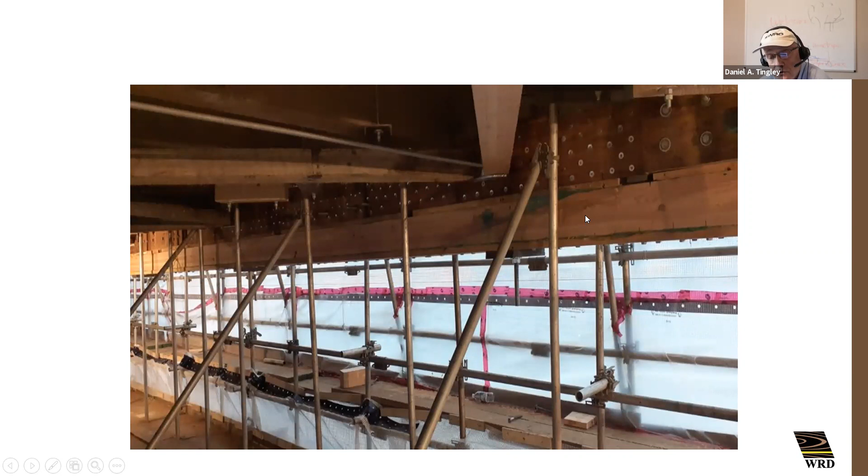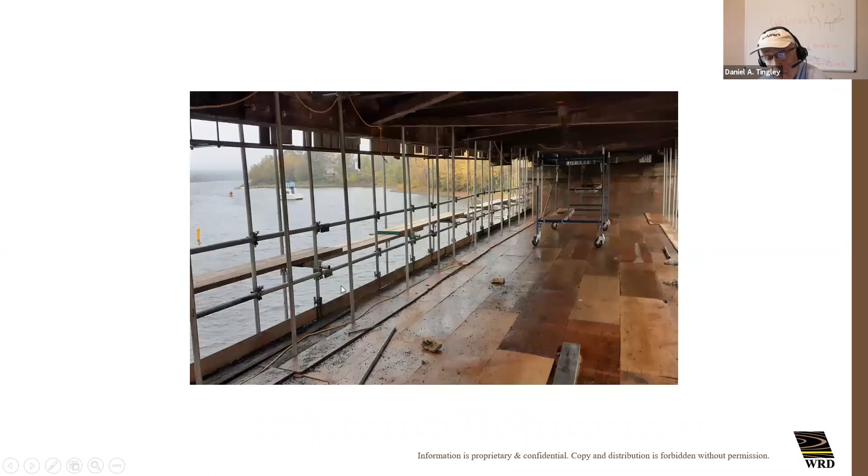One bad area was where the steel had lost strength due to embedded corrosion, and we had decay from blow-in water. It led to this bearing plate and hanger rod getting right up in the tension chord. You can see embedded corrosion loss all over the place, so we had to take it out, and here it is — decayed on the inside.

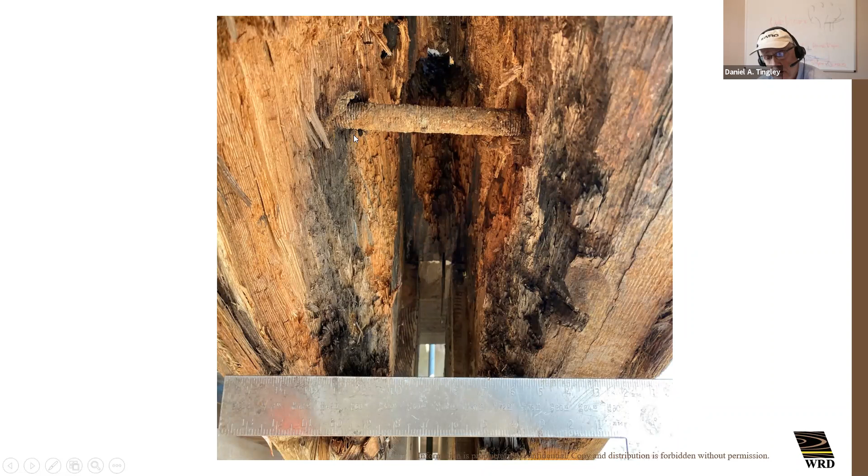This is the lateral strut rod that went through here, and we basically couldn't save the wood at that spot. So we used engineered wood, created a trapezoid with the proper hole for the hanger rod, put pieces in tension to hold it, pieced one tension chord at a time, glued and inserted them, fixing this piece by inserting engineered wood with high strength fiber, glued in place and restored the bridge.

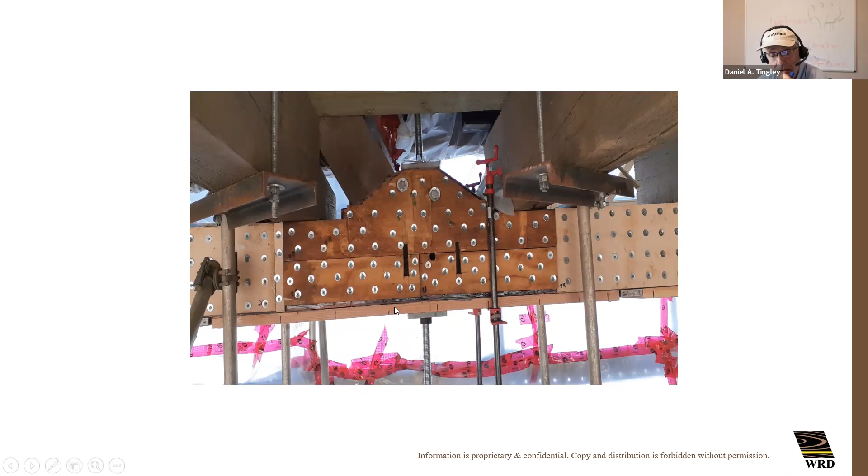We put in shear panels on the outside to compensate for loss of strength due to horizontal cracking, caused by localized loads that fell between panel points because beams rest on top of the tension chord. We put it back in service with advanced engineering ideas like shear panels screwed and glued to the piece, tension fiber, and laminated beam packers, restoring the bridge to its full strength.

Not just its full strength — it was designed at the turn of the century for 12 tons. We've now raised its load rating to 30 tons, restoring a lot of bad actors in the process.

We healed up the skirting to keep it protected from the rain, got our lift elements off there, and put in strain gauges all over the place so we could monitor the traffic going over it.

After two months, we've already realized that truck traffic is getting at it — 42 tons is the highest we've recorded so far. We notified DTI in New Brunswick that we're watching with the cam, we've got strain gauges, and the bridge is getting overloaded, so they can go out and catch people to preserve the bridge and extend its life — from health monitoring to high strength fiber restoration to inserts.

These are the ways, across a broad spectrum, we extend the life of this asset. It's 100 years old, and we're going to extend its life another 100 years. It was designed at the turn of the century for 12 tons — let's raise it to 30 tons, make it more accessible for the community, for fire trucks and other vehicles. Extend life, health monitor, and put this asset back in service at a fraction of the cost of new. And to monitor it and make sure it's protected, we'll put gauges all over it.

So at this point, I want to change. We've covered the wood, its characteristics, how we extend life, and where the bad actors come from due to decay.

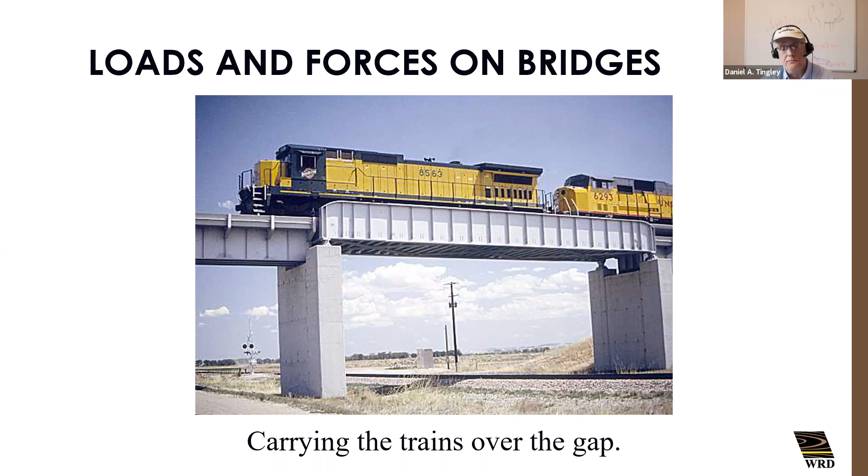Let's talk about how we get loads and forces into bridges. Impact loads from wheel loads, for example, can get into steel, concrete, and wood bridges — they do so differently. Typically when we look at a bridge, we're looking at weakest link theory.

If someone threw a chain off the side of an observation tower in the Grand Canyon and said, 'I'd like you to hang from this chain,' and told you the average strength was 21,000 PSI, but forgot to mention the weakest link was only good for 25 PSI — who would want to be hanging from that chain? It's weakest link theory that drives timber bridge design.

We're looking for that weakest link, whether it's created by slope of grain around a big knot, by excessive checking, or by some decay that got in around a vertical fastener.

In a deflection criteria — a specific criteria, essentially a rate of deflection for a given load — we set limits. For example, in the railways, on a typical 12 to 15 foot span, they set a limit of 5/8 inch, or 15 millimeters, of deflection when a train goes over it.

That's its limit, that's a specific criteria. We have the same for bridges in Canada with live load with truck traffic. We say L400 for live load. Now if I've got a 40-meter bridge in the span, the live load limit is 40 into

40,000, or 100 millimeters of deflection. Well, when a bridge like wood is put in place and it's lightweight for a given load, it becomes very light, and so we don't like to see 100 millimeters of deflection. So we set the deflection limits a little tighter, because we can feel 4 inches. Who would like to be on the bridge if it deflected 4 inches as a truck went by? That would be nice. So you try to control that through dynamic analysis.

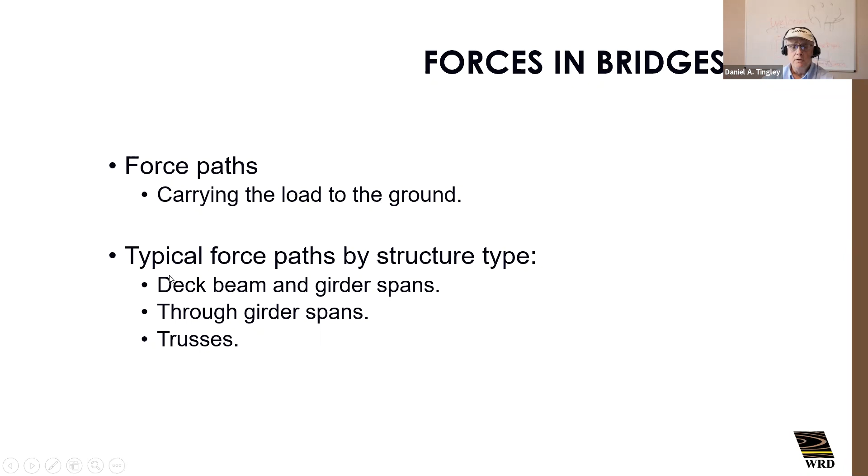So forces in bridges, we have to look at the force path. How does the load get from the top of the gap to the bottom of the substructure? And the force path usually goes through decks, through superstructure, and through foundations.

It creates a series of stresses. The forces resolve themselves into tension, and these tension stresses are handled in the beam. We get compression in the top half of the beam, the bottom is tension, or in a truss, we separate the tension and compression chords by a lot so it can carry bigger loads, a longer span, with smaller amounts of material. We use the mechanical leverage of separation, the moment arm.

ductility. To put it in reference, the failure deflection of a glulam beam is L90, that's length over 90, to L120. The failure deflection of a reinforced glulam is like L20 to L30, lots of ductility. Listen, if you're on a bridge and it's deflected L over 20, you probably deserve to go down with it. Get off of it. You got lots of time.

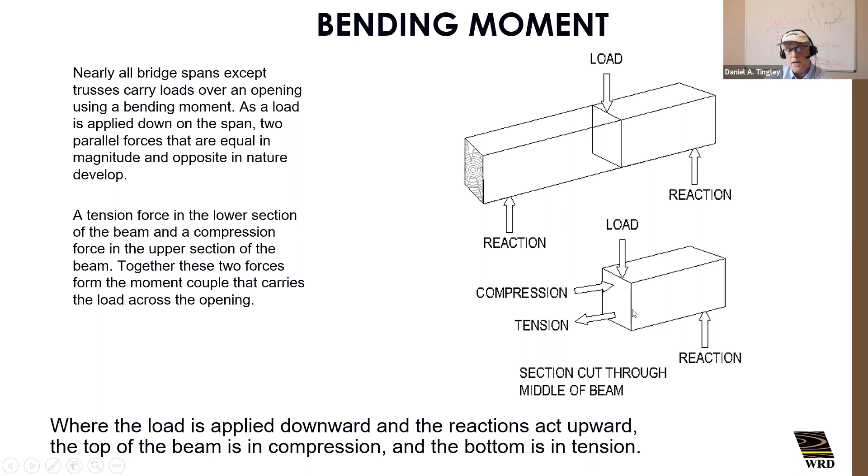So in bending moment, we've got a load, wheel load. It creates a reaction where we look at the compression perp as a specific criteria. It creates compression and tension in the form of an applied moment couple, which we resist with a resisting moment couple. If we've got a slope of grain down here because of a big knot, that slope of grain reduces its bending capacity, and it's a reduced resistance couple. And that's what we watch it for.

So we test big beams to find out what they're going to do under load. We can calculate a load deflection curve and calculate its MOE of bending. And remember, it has a different MOE for bending, for tension parallel, for tension perp, for compression. These are different MOEs, and a lot of engineers don't recognize that there's a modular ratio within wood. Wood has a different MOE of compression than MOE of tension. And the modular ratio of Doug fir is 1.06, for example. Its compression MOE is less than its tension MOE.

And these factors are important to know when you're doing PDA, for example. You understand it's axial compression - don't use bending compression to calculate an axial response.

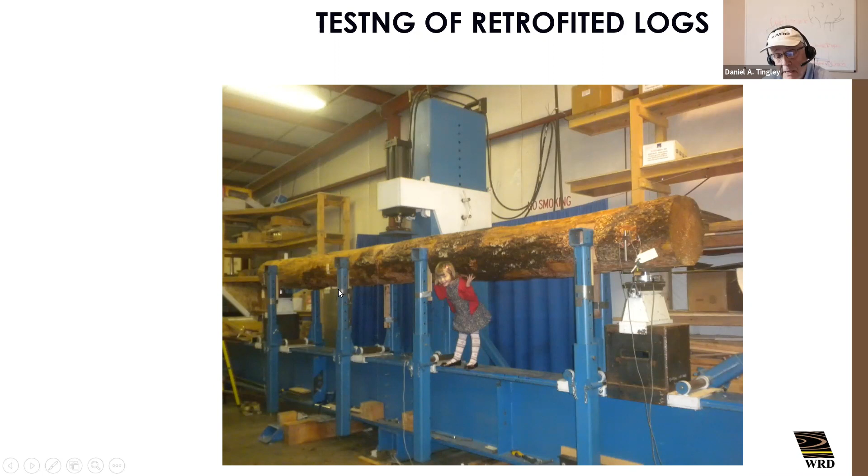So when we test round logs, another very important feature - here's Beth doing their weightlifting deal. I haven't got the load applied, so don't think I'm in for child abuse. She's in the lab one night when I'm doing some testing. We're testing this big round log to failure.

What did we find? Well, the round log moment failures typically occur about a third the way in from the small end. Engineers, if you're using small end diameter for logs, you shouldn't be. Use the diameter at a third point for your moment calcs. So you can see here, we sawed it up into timber. We got to look at those knot sizes, as I said earlier, get them in right.

Here comes a bunch of beams used to build a big bridge down in Louisiana, long, multiple spans. Creosote treated - they didn't know what the knots looked like. Who knows what's upside and downside? They should have an aluminum tag showing you which is up and down. So they lay a bunch of them and they put them all in.

They panelized the track. They put a whole bunch of girders in. You see them here scissored, interleaving, and put them all together. Half of them ended up failing within 3 to 5 years, and that does not look good for timber. But it's not timber's fault. Someone should have told them that there's an upside and a down.

When you pentatreat it or copper naphthenate treat it, you can see the knots, and it's easier to tell contractors and installers and carpenters, hey, make sure you turn the big up. When you don't turn the big up, here's what happens.

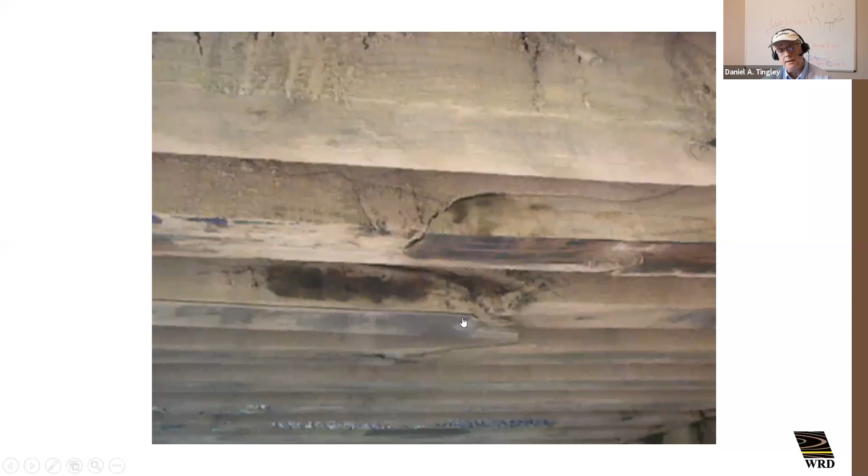You get a slope of grain around a big turn down. These guys are installed upside down. One goes, then the sister goes, and the first thing you know, you got trouble, and you've caused that by your own lack of understanding of which side was upside down. You can see it here.

So you can reinforce them to fix them, which you can with high strength fiber, and get where you're going, fixing these guys. And when you fix them, you can increase capacity a lot. You can flex them, reinforce them, and fix them a lot.

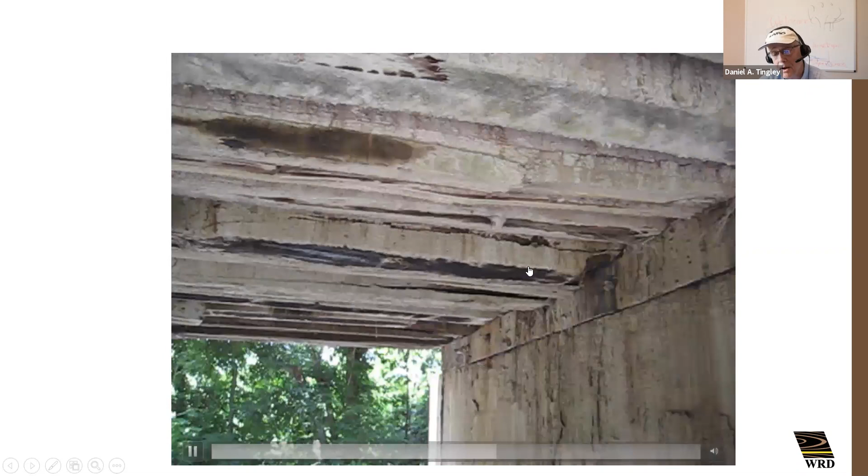This right here is another feature of wood that has nothing to do with the strength of wood. It has a lot to do with stupidity. You can see the engineer of record had replaced a lot of these girders because he vertically spiked them. When he replaced the girders, he let them notch the girders with a notch. Differential stiffness, abrupt differential stiffness, led to reentrant corner peeling forces or tension perpendicular, which lead to this failure.

You can see this freight train's on a slow order, you can hear it. And because it's going slow, you see the cut right here. They thought they'd go further back because this guy failed. So the next one they put in, they cut the notch further back. Guess what? Didn't help. That's not wood's fault, guys.

Just for the lack of this - these could have not happened if they'd have done this. These could have not happened if they had done this. This wouldn't have happened had they done this. The simplest things are the best.

Slope cutting and notches - we eliminate abrupt differential stiffness and prevent reentrant corner cracking and reduce tension perpendicular stresses, peeling stresses, and tension. Corbels, they're not a landing.

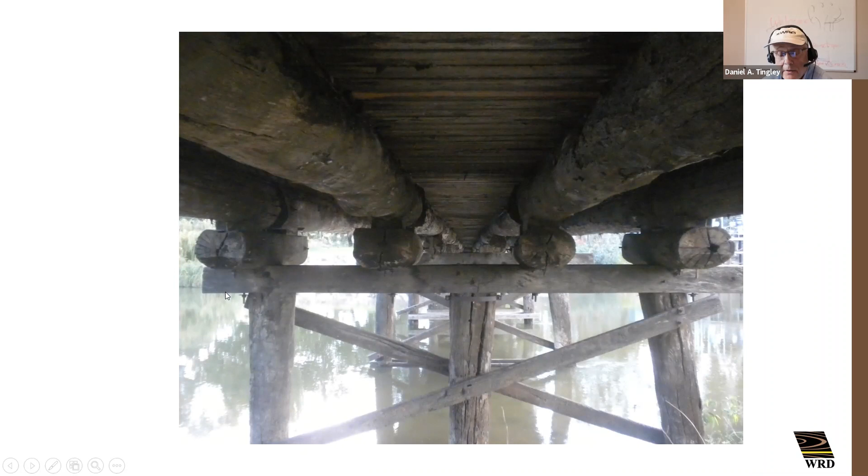They're not a cheater. Engineers, don't consider them a cheater. The corbel doesn't shorten the span. Even if you put two verticals on each side of this corbel, it doesn't shorten the span. It doesn't work, so don't do it. The span is the span - it's a center reaction to center reaction in a simple span.

These knot whorls is where the tree will fail because of slope of grain in flexure. So when we test pieces, we look to strengthen the piece with high strength fiber, for example, as a way of transitioning stresses around the knot whorl. Around the knot whorl, we use a shear panel to increase the horizontal shear strength at the end of the piece.

Shear in wood - horizontal shear in wood is cumulative and it's length governed. We learned that from realizing that cantilever beams would fail in horizontal shear. Why? Because we didn't have enough cumulative length, and Canada leads the way with shear with their volume calcs.

This year in C9, we're about to increase the base horizontal shear value for Doug fir to 2.0. Why are we doing it over 1.5? Because we're following O86, so we can use our volume calculations to increase the capacity of wood in shear. Canada leads the way with shear.

So how do we know this? It's because we test things, use a high definition post trigger, and look at how pieces fail in bending. You see the chips floating away here. We're understanding how things are failing by looking at them fail.

Where did that fail? We thought the LVL piece was enough to shelter off this knot. It wasn't. So when we put it into failure, bang, how did it fail? It failed right there in tension. Tension perp.

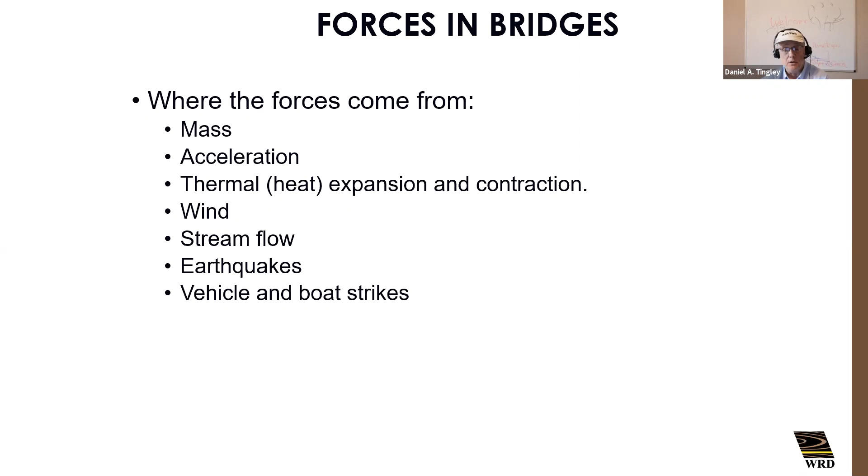The same forces apply with acceleration. Thermal forces happen because of expansion and contraction due to temperature on your connectors, plus wind, stream flow from lateral debris fields, earthquakes, vehicle and boat strikes. There are lots of different forces that create stresses on our timber bridges.

A lot of engineers don't understand how to calculate the lateral load in a railway bridge—that nosing load, because the train wants to hunt between tracks, creating a lateral load. Typically in a railway trestle bridge with 15-foot spans, we'll use 25,000 pounds of lateral load on the cap to simulate the nosing load. Or if it's a through truss, we'll use 1/16 of the live load to calculate the lateral. That's how we approximate the lateral due to nosing.

We do the same with truck traffic, and that compounds with debris fields if your area has the potential for the bridge to come under force from a debris field as the water rises. So these are the types of things we watch in our bridges in terms of the forces we consider.

Independent forces might come from thermal effects, stream flow, and soil pressures on our abutments. We have soil pressures that push out our abutments, like in Saskatchewan, where our piles weren't driven that deep and it's all ash. When the groundwater table rises, it puts a lot of lateral force, and our lateral forces in our abutments are handled by the girders.

If I vertically drift-pin the end of the girder into the cap, into the top of the pile, and it's all decayed, I no longer have shoulder resistance in the drift pin. They're not joined together, so the girders can't carry the lateral for the abutment. What do the abutments do? They all want to come in, rotate the cap, and fall into the river.

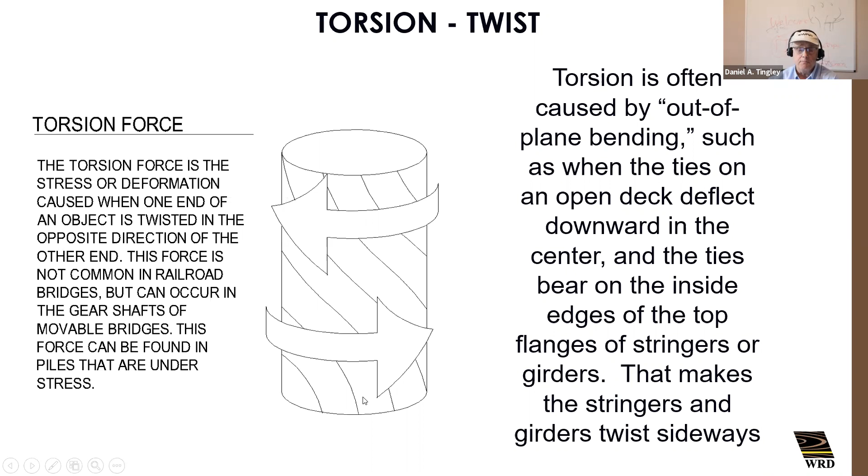The other thing that happens with our piles is we get torsional forces. If I've got a steep microfibril angle, torsional forces can be big and hard to handle. We need to reinforce them with high strength fiber or post them with a standardized posting detail.

This is a detail I wasn't taught at university—how do I post something? I was never taught this: proper rotation splines and off-center drift pins so I can put side plates on it, creating rotation resistance, lateral resistance for a moment, and shear resistance.

This is not a posting detail—you just make a cut and put two big spikes down in here. I don't know who thinks that's a posting detail. It's not. It might hold it there for a while, but if it gets any aggressive lateral action or so on, it's not going to be there.

And who thinks this is a good idea? They cut the pile here, put crazy glue on it, and wrapped it with duct tape. Then they cut the pile so it's horizontal to slip the posting piece in easier. Well, you don't do that—that's a batter pile, you have to have it perpendicular to the axis.

So that's not proper posting. No, you do a proper posting—you don't toenail them in.

And if you go over two piles on a bench, you got to partial mud sill it, as you can see here. Or if you've got a bad pile, you might choose to straddle bent it.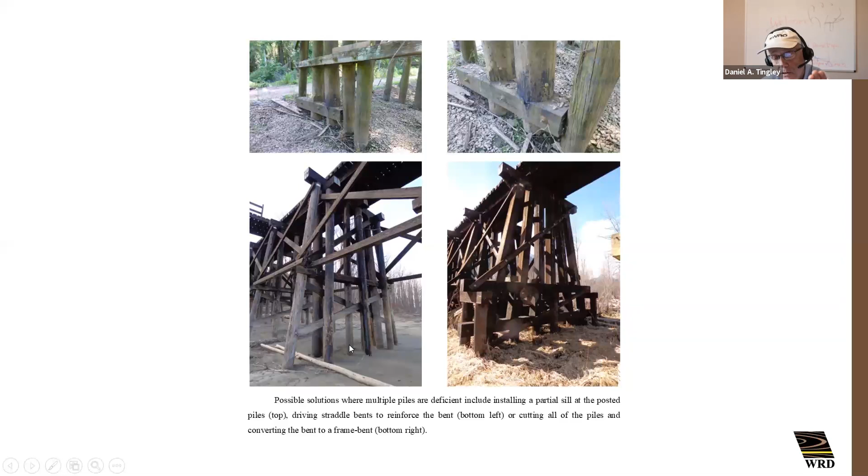I got a bad pile. I couldn't vibrate it out. I had to drive a new one. I couldn't take the cap out because the bridge had fallen down. So I took a few ties out, brought a pile driver in, drove a new pile each side of this bad pile, chained the top together, put a transverse subcap underneath it, and compensated for this piece. That's a pretty expensive way to fix a pile, $28,000 on average, when I could have just wrapped the bad actor down here and fixed the pile in situ with a high strength fiber.

So this is what torsion refers to in a pile. You can see it here. This is the microfibril angle. It just got into service. It should have been better inspected, but it was creosoted and it slipped in. It was a batter pile. The train stop and start puts torsional forces on this batter pile. It goes perpendicular to grain and tension along the microfibril angle, and the rest is history. They have to come in here, put a temporary soldier in here, a batter, to fix this guy.

And so wrapping was developed to help heal up piles. We tested them under axial loads, found out there's good ductile failure, and we can use wrapping, wet laid wrapping, not a pre-cured wrap that you have to infill with a grout so that it tights.

You can't have piles tightly wrapped because when they draw up water by capillary action, they expand, put huge hoop stresses on your wrap, and they sap all your lateral capacity and bending by putting expansion forces on the piece. So you have to allow a little gap in here by using a saran wrap that allows this to slip and allows this to expand.

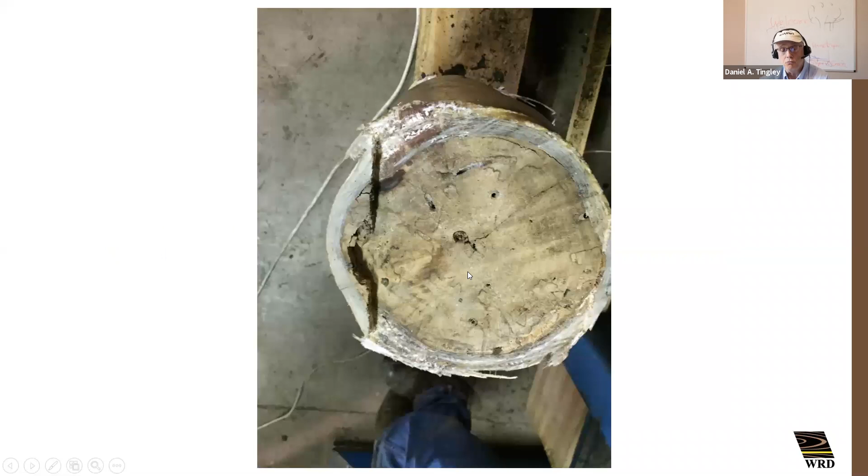And you then use the fibers the right way. The fibers that wrap around are for axial capacity because they resist bulging in the hoop direction. The fibers that go up and down the pile are for lateral bending. So this wrapping allows us to increase the capacity of a pile.

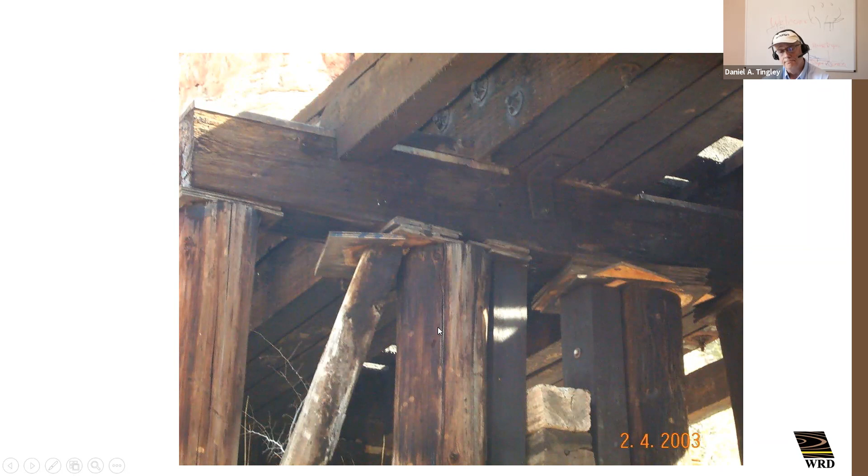So moving on from there to pumpers, that's piles that pump because they're losing capacity or you've got overloading on them. You don't shim a pile that's pumping. Don't shim it. A shim will just drive the pile deeper. This is shimming on steroids. It doesn't work, won't work, and will not work. Don't shim them. If you want to fix them, get down underneath here and expand the pile's capacity by a partial sill, a partial plate, a footing, and that'll save this cap from horizontal cracking because your shear span is doubled due to a pumper.

And this isn't the answer either. They took those out of the code using a precast concrete cap to extend the pile load without failure, and horizontal shear just puts more load on your batters. A rule of thumb, 15 degrees off center reduces your pile capacity 50%. If you want to crack your batters, put a precast concrete cap across them when you got a bunch of pumpers. It'll roll the load out here and your pile won't be able to handle it and it'll flex and fail. And they did. That's in Saskatchewan, right here.

The engineer of record says it's amazing how they drove all the piles. They took these curved piles and drove them so that the curve come all at the same point. And I said, what? Well, they used the bad piles in the batters. I said, they didn't use the bad piles in the batters. This precast concrete cap is driving load to the batters because it's carrying more load from these plumbs over here, and these are flexing. They're breaking on you.

So this is one where we're driving piles right now in Dillman's Bridge down by Halifax. These are Doug fir copper naphthenate treated piles. They're what I call COVID piles because they were purchased during COVID days, and they're big.

These are tip bearing piles, big piles. They're driving them here with a diesel hammer, and they'll finish them off with a drop hammer. This is part of driving timber piles. It's a great way to do an economical abutment and get where you're going with timber.

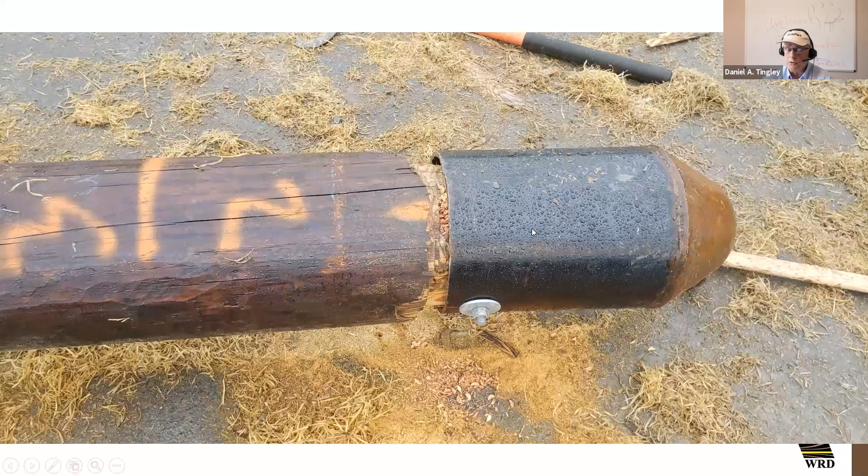So this is a boot, a nice boot. Get the right kind of boot, grout it in, the right kind of design here, because you're going to hit till in 8-10 meters maybe. That's why there's so much cribbing in the Maritimes, because there's so much rock outcrop. It's hard to drive piles. So in this case, we had till down 8 to 10 meters.

So we could put a nice boot on it, grout it, and then cut off this nut or this extended thread so it doesn't catch stuff, and drive it in the ground. You can see the tops here have been cut down so they can drive the first part with a diesel. And that's a diesel coming at it right here. You put the diesel setting, and every time it gets resistance, the diesel explodes in the chamber, goes up, and this hammer delivers 14 to 15,000 foot-pounds, and we drive them in first with a diesel.

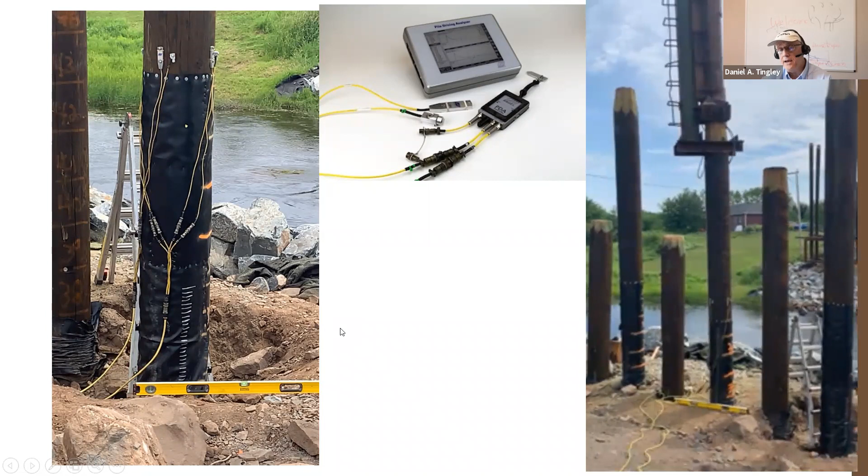And then we finish with a drop hammer, and that's how we get that bridge built. This is putting the PDA, a pile driving analyzer, on the pile to check what the resistance capacity is. This is a frost jacket, a crazy carpet that you put around in the frost zone that keeps them from getting jacked in the frost time. And this is showing you using that final drop hammer to do the finishing touches.

Well, what are typical dynamics of piles today that we use?

Typically today, a timber pile can be good for 25 tons. Typically, I drive them to 3 times that. Typically, I look for termination at 1/8 of an inch with 3 blows. Typically, I finish with 20,000 foot-pounds. And in this drop hammer, the specifications I set for the drop hammer are 6 blows at a 4-foot drop with a 20,000 with the over 3,000 pound hammerhead.

The reason I did that is because I needed 6 to get it out of set, because piles set after you drop. If you're driving them and you walk away, they'll set after 24 hours. So I need to break set, and then I'm going to finish driving until I hit 1/8 of an inch in 3 successive blows, and that sets termination. All these piles terminated. You can see them here finishing off.

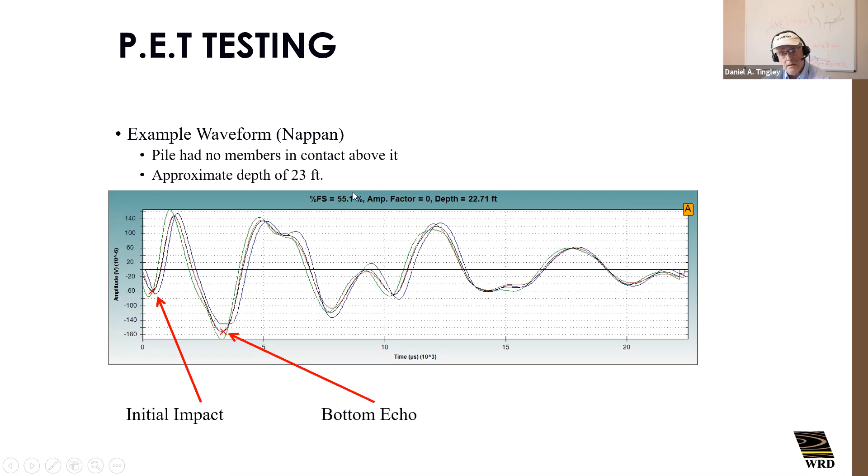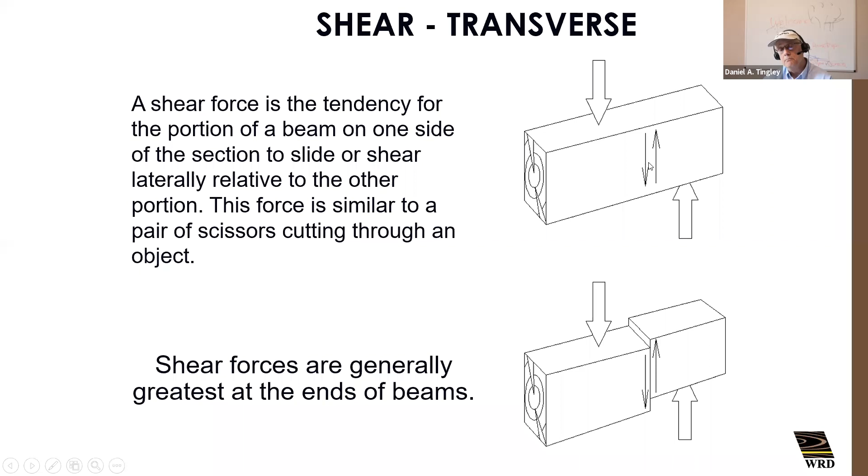So moving on from piles to shear transverse, we talked earlier about shear and longitudinal shear, horizontal shear. This is not the shear that governs in timber. Yes, it's equal to the horizontal shear because of the cube stability, but it's not what governs. It's this shear horizontal that governs. This shear, you can see the failure due to decay. Micro checking leads to a shear problem.

So horizontal shear is what drives it, the shear, and this is the shear we watch for. And this is the shear here. It maxes at about 1.9 D away from the reaction. That's where it's parabolic, about the neutral axis, 3 halves VA. At the reaction point in a simple span, the shear is 4 halves VA.

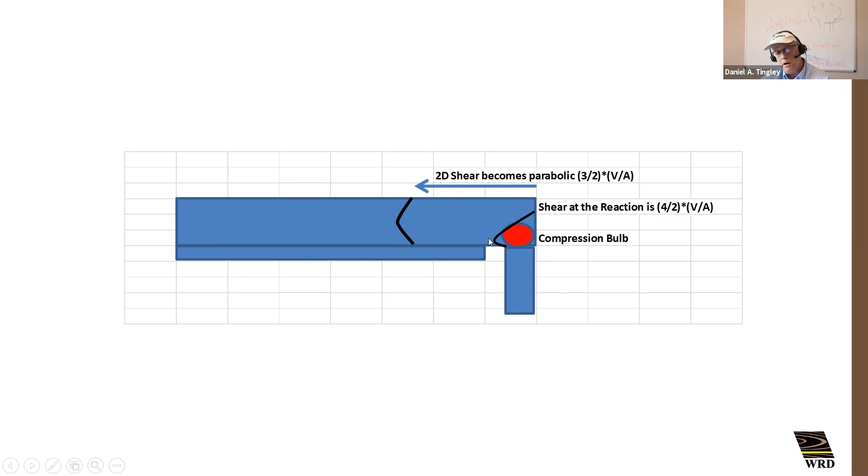And the reason we can ignore shear a distance D away from the support is because when shear is associated with compression perpendicular, it's increased 50%. And this is where the maximum shear is. But if I'm out here a little bit outside the compression bulb, I can run into shear problems at the bottom. That's why notches are so critical to have them slope cut.

You can see this, Mandry was the first one to figure this out in '69. This is the basis by which we ignore shear D away. If you use your volume calcs in Canada, you can't ignore it. You have to consider shear all the way along and resistance all the way along.

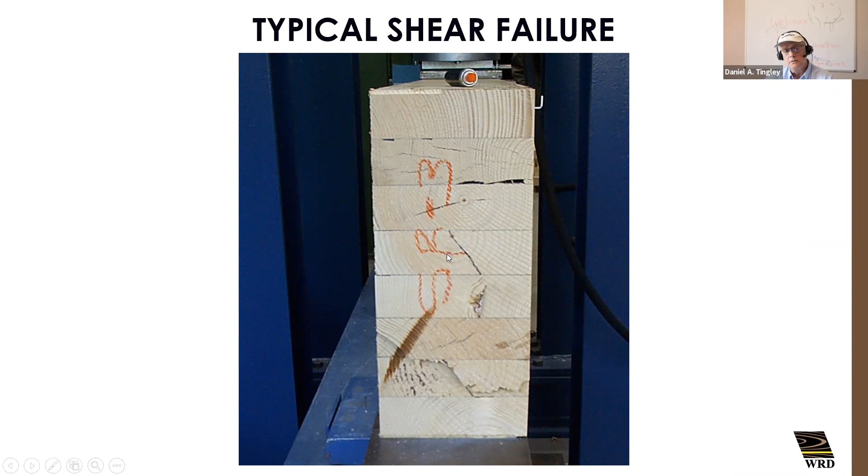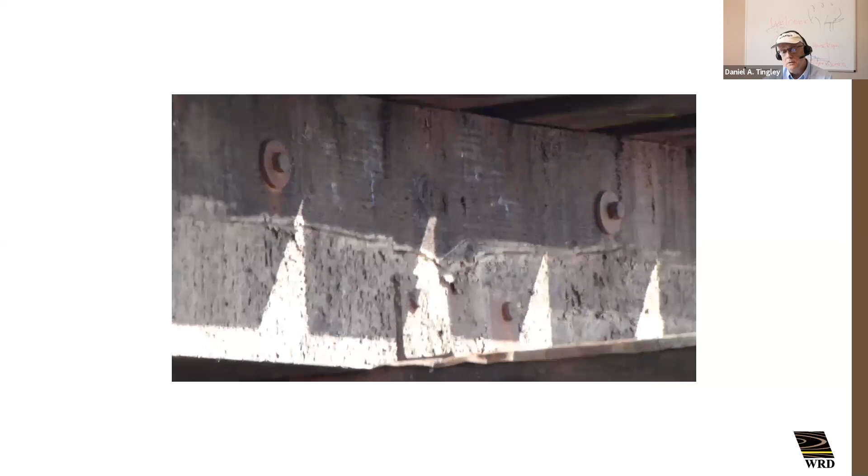This is a coal train going down to Seattle, going across the bridge at White Rock. You've got interleaved chords with 4 plies, half of them simple, half of them continuous. The shear is drawn to the stiffer continuous element. When it gets into the continuous element, if you designed it as a simple span, guess what? The shear is much higher and it gets shear failed.

And what's the white stuff? That's white wood powder that's rubbed up because of this traffic going back and forth, and water from the vertical drift pins above flushes it out onto the side. And where is the shear failure? At the continuous element across the reaction point, shear migrates back up toward the neutral axis, and there's where it failed. That's a horizontal shear failure.

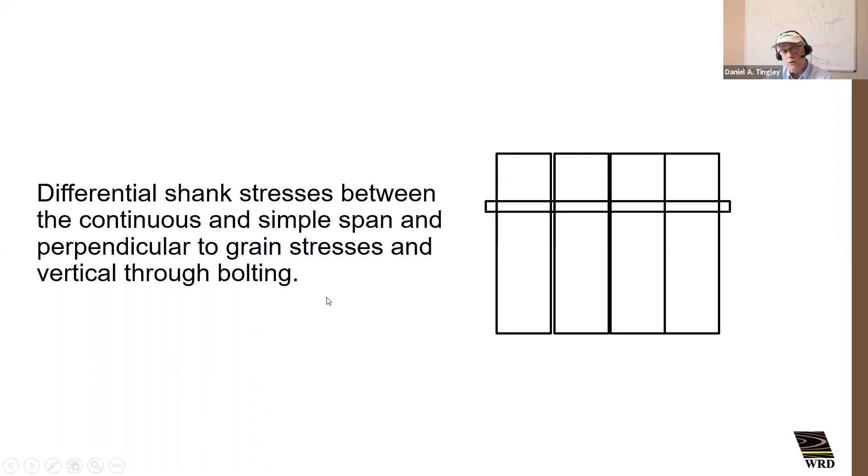So sometimes they are shear cracks and you have to put shear plywood on them. Like this one out in Kootenay Landing East, a Pacific Rail Bridge. It's a hard fix for stiffness, strength and bending, and horizontal shear with shear plywood. That allows us to fix these entrance spans where the trains first hit the bridge and create the most damage, coming off a stiffer approach onto a less stiff bridge.

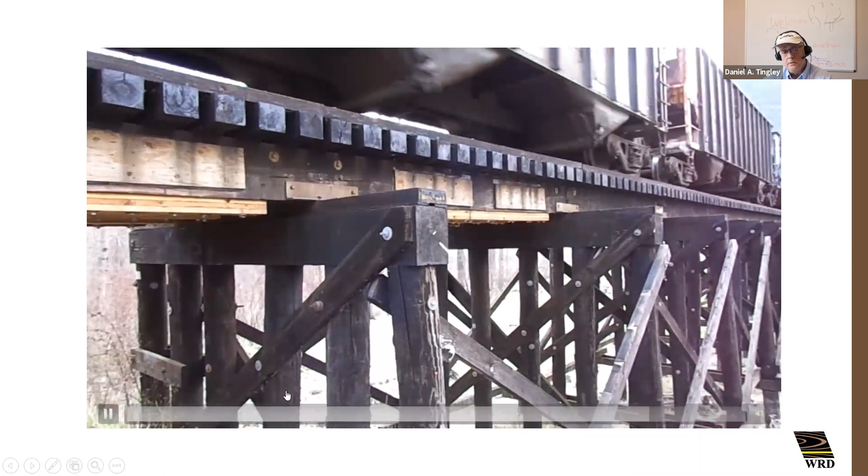So kind of leading up to the end of this little webinar, this is a teaser. This is what we call near end drift bending. It's a tie spacer guard timber in addition to inner guardrail, and you can see what's going on at each one. We're going to talk about pilot hole size, end distance, and what happens when the inside, out of sight, isn't out of mind.

And that's going to be kind of in our next webinar series, as you can see here. So looking forward to having you all back on the 21st again, as we get into more depth and into the more minutia here about these. And this brings to closure webinar 1, and I'd like to take questions now. Thanks.